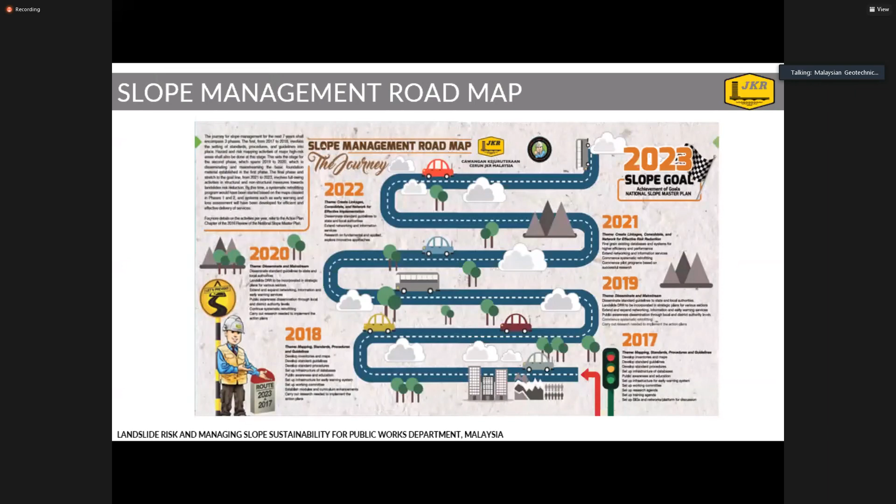Okay, the sentences are quite small actually. All right.

Okay. This is the abstract for our National Slope Master Plan, or we call it Plan Induk Cerun Negara. The first was from 2009 until 2023. However, we have the plan to extend it for another 15 years. So this plan actually serves as a roadmap with 10 main components.

This is under the purview of our slope engineering branch department, and the objective is that the plan should be a dynamic or living document. It should be reviewed and revised throughout the years as national social, regulatory, and technological changes occur. It is designed to be a comprehensive and effective framework.

I would like to mention the 10 main components of this national master plan. The first is to establish the policy and institutional framework. Of course, we have hazard mapping and assessment. We're going to have loss assessment. We are going to have the early warning system and real-time monitoring. We are establishing information collection, interpretation, dissemination, and archiving.

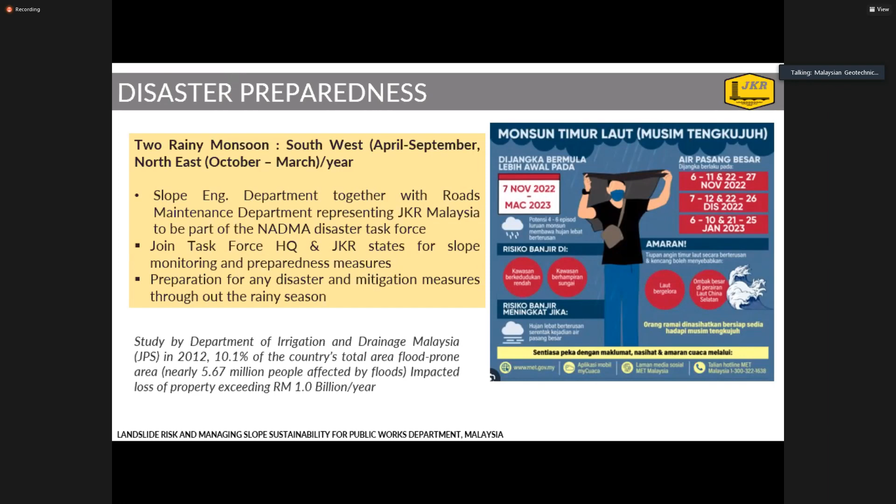A study by the Department of Irrigation shows that about 10.1% of the country is prone to flooding. Of course, about 5.6 million people will be affected, and the recurring cost will be about 1 billion per year for repairing all these slopes and other assets.

Okay, in conclusion, we have 7 key strategies in the slope engineering department. The first one, we aim to have corrective and emergency works for all federal or state roads and also government buildings. We are doing slope preventive work throughout the entire road network for the Peninsula, Sabah and Sarawak. We are establishing forensic and design in our department also. And we are promoting public awareness and education.

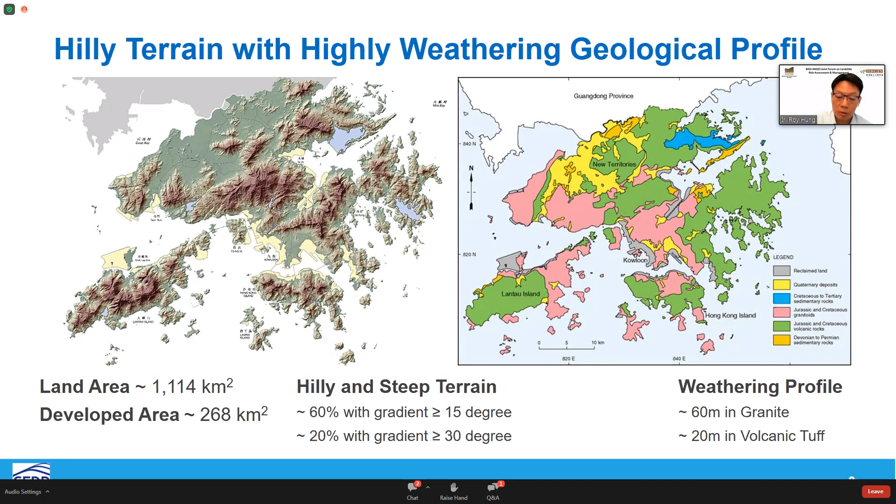But here comes another factor: urbanization. In the old days before 1970, as the history of landslide risk in Hong Kong has been broadly introduced by Hong Kong GES President Dr. Andy just before, the slopes and retaining walls were commonly formed improperly as part of urban developments, such as building roads or other residential buildings.

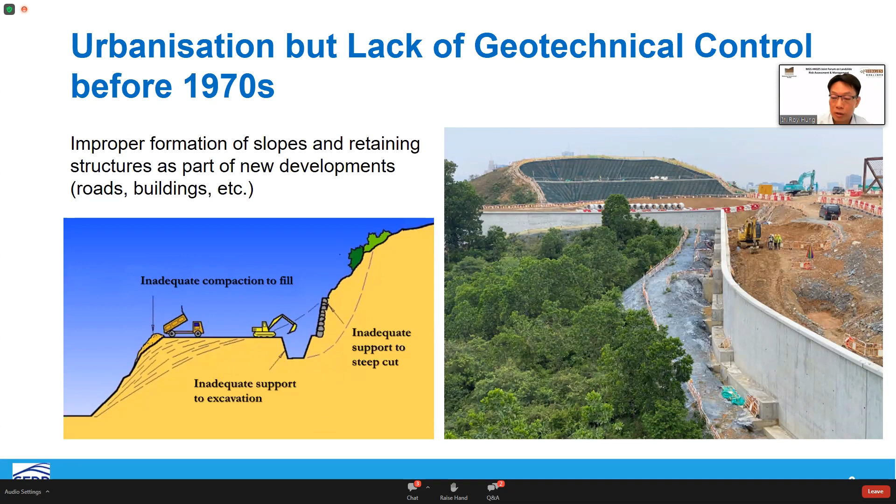So as a result, based on the factors we have just mentioned, the landslide risk is high, and there were a number of catastrophic landslides in Hong Kong, in particular in the 1970s, like the Po Shan landslide and the Sau Mau Ping ones, some with a single landslide incident causing over 70 deaths. So this set the scene of the high risk of landslide in the old days in Hong Kong.

Because of the high risk of landslide, it called for the Hong Kong government's action to work out how to tackle it, not as a one-off operation, but in a systematic manner to bring down the landslide risk in the long run. This is the so-called slope safety system that we have today. It is a long-term commitment and a huge social investment. To some extent, such a slope safety system also gave rise to the growth of the geotechnical profession in Hong Kong.

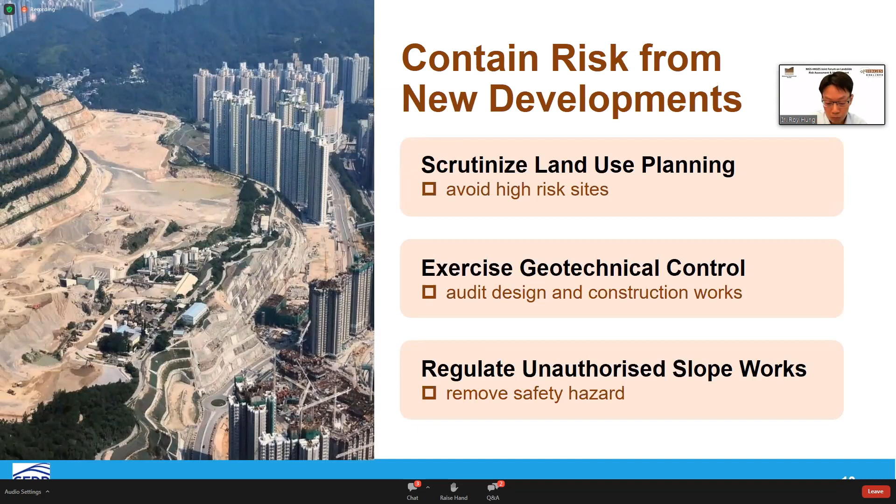The objective of exercising geotechnical control is to ensure that the design and construction of slopes and retaining walls are done to a required safety standard, both design and construction. It applies to all developments, whether government infrastructure projects or private developments. Based on these photos, some building construction in Hong Kong is on steep slopes, so it deserves tight control to make sure it is technically acceptable, as do many mega-scale government projects like highways and railways.

When it comes to the potential hazard of natural hillside landslides that could affect proposed new developments, we regulate by requiring detailed hazard assessment and the provision of the necessary hazard mitigation measures, for example, in the form of a landslide resisting barrier structure.

For mitigating natural terrain hazard, it's more tricky. Apart from controlling the engineering design or its layout, we would also advise proposed developments to locate away from where the landslide hazard may be more severe. As you can see here, part of this hillside was hard hit by previous landslides, maybe in the form of channelized debris flow. So we advise them to relocate a little further in order to reduce the risk.

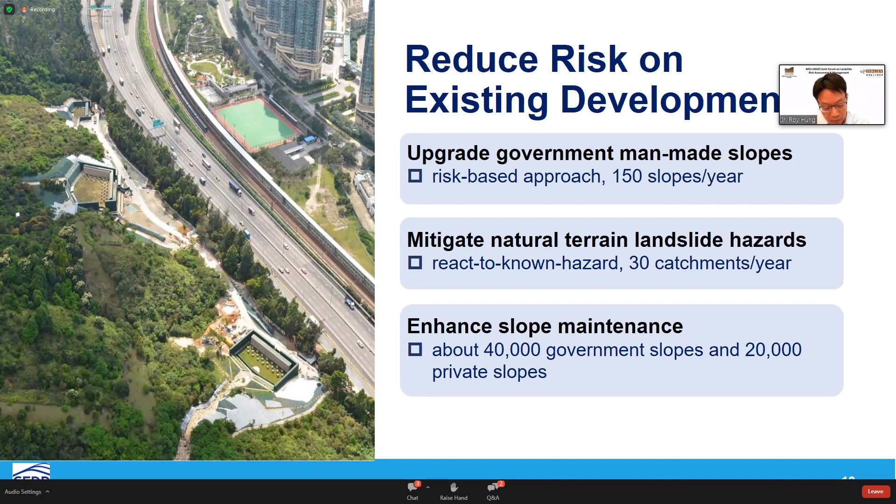Okay, it's about retrofitting the existing slopes, right? We have been doing this continuously through a rolling program, the so-called Landslip Prevention and Mitigation Programme. This one started in 2010, but our history actually dates back decades. To sum up, it is not a one-off, but a long-term operation covering the entire territory.

Our target is to upgrade around 150 government man-made slopes based on a risk-based approach, and also to mitigate the potential hazard of 30 natural hillside catchments based on a react-to-known-hazard approach. So what is the so-called react-to-known-hazard approach?

That means across all the natural hillsides in the territory, we'll identify those for which the risk is higher, as evidenced by previous landslides there, as you can see in the photos here. Particularly for areas with previous landslides, we'll opt to handle them first by building some defensive structures.

So for man-made slopes, we upgrade them through different engineering solutions with respect to the different types of slope. For example, for fill slopes, we'll do recompaction or replace with some stronger material. For cut slopes, we normally upgrade them using soil nails. In fact, nowadays soil nails account for over 95% of our slope upgrading works, which is our principal upgrading scheme.

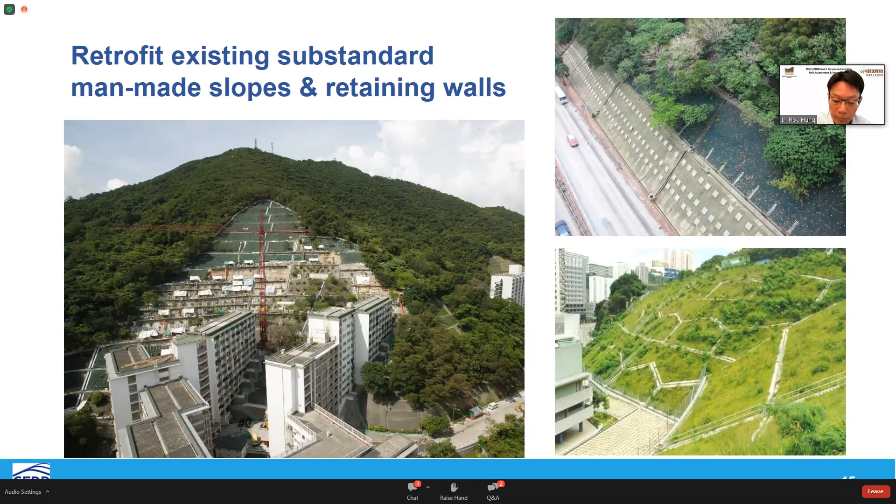And for natural terrain hazard mitigation, in principle and if practical, we will provide defensive measures such as barriers against the risk of landslides, instead of stabilizing the potential landslide source areas uphill. For example, reinforced concrete barrier structures and steel flexible barriers. There are also some enhancements such as boulders within those barrier structures for energy dissipation.

As part of our slope upgrading works or natural terrain mitigation works, we also incorporate elements of ecological enhancement in order to make the slopes greener and more ecologically friendly. And we also use some guidelines to promote greening and bioengineering.

When it comes to slope maintenance, we are taking a systematic management approach, first clearly defining the maintenance responsibility. We have altogether around 60,000 slopes in Hong Kong, and for each of them, we assign a maintenance party or agent who is responsible for the maintenance work. In principle, it's just like asset management, right? The government is responsible for the maintenance of 2/3 of them, while for the rest, the private owners have to do the maintenance work.

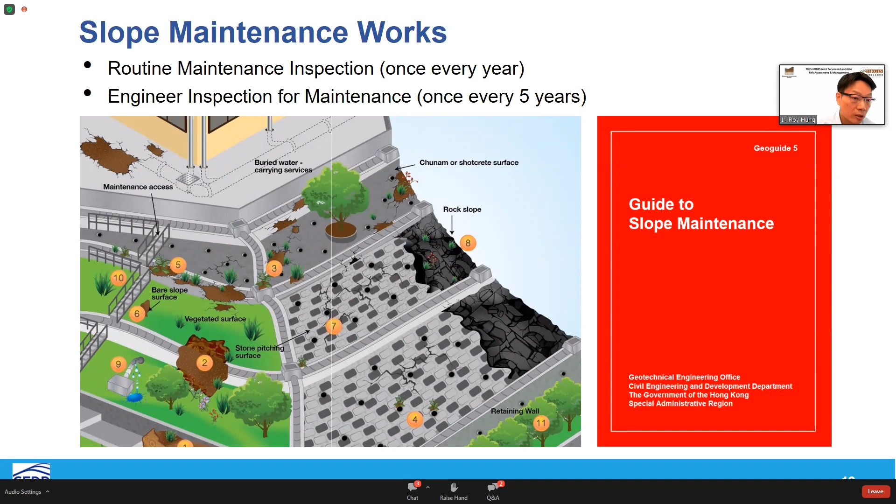Slope maintenance may appear trivial to many, but it should be done properly if you want it to be effective. So in this regard, we publish guidelines to advise on what to do and when to do the maintenance-related inspections by a suitably qualified person, and to carry out the respective maintenance work as needed. For example, here are some guidelines showing what to do and where, so that even maintenance agents who are laymen and not geotechnical professionals know what to do.

Okay, about the multi-pronged landslide mitigation strategy. Thirdly, we are also managing the risk by minimizing the landslide consequence. What does it mean? Apart from the engineering measures we just mentioned, it is equally important and effective for us to raise the awareness and preparedness of the general public against landslide risk and to stay away from it. To some extent, this approach is more people-centric and cost-effective because it doesn't need huge capital investment.

So what we have been doing is to clear squatters with vulnerable structures from hilly terrain, and provide landslide emergency services in order to minimize impact and damage. Also, we issue landslip warnings to alert the general public and educate them on precautionary measures.

But in Hong Kong, we have a landslide warning system here, for which the warning is issued by the Hong Kong Observatory, like other weather-related signals, in collaboration with the GEO. It aims to alert the public on the risk of landslide at the time of heavy rain, and whether or not to issue the warning and when to issue it is actually based on the rainfall intensity by the rain gauges across the territory.

Well, based on our experience, this warning system is quite promising. Why? Because it is promising in alerting the public, because actually most of the recorded landslides that occurred were occurring at the time when the warning signal was hoisted. So that means the rationale we have been putting in for the landslide warning is quite effective.

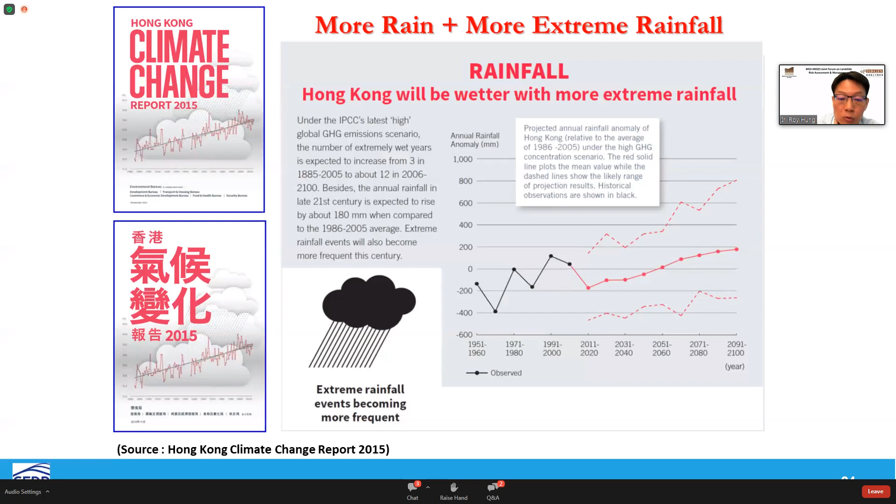So ultimately, what is the effect of the extreme weather and rainstorms? That is more landslides, landslides on a larger scale, and the landslides become more mobile. So to summarize, the climate change will make our landslide risk higher and higher.

Okay, so here is another challenge, again about climate change, but this one is about the mission towards carbon neutrality, which is a global mission for all, right? So in the year 2021, that is 2 to 3 years ago, Hong Kong also put it in our agenda officially and set the mission and vision so as to align with the international ones. We are also in the agenda to cut and reduce the carbon emission per capita and also for Hong Kong society overall.

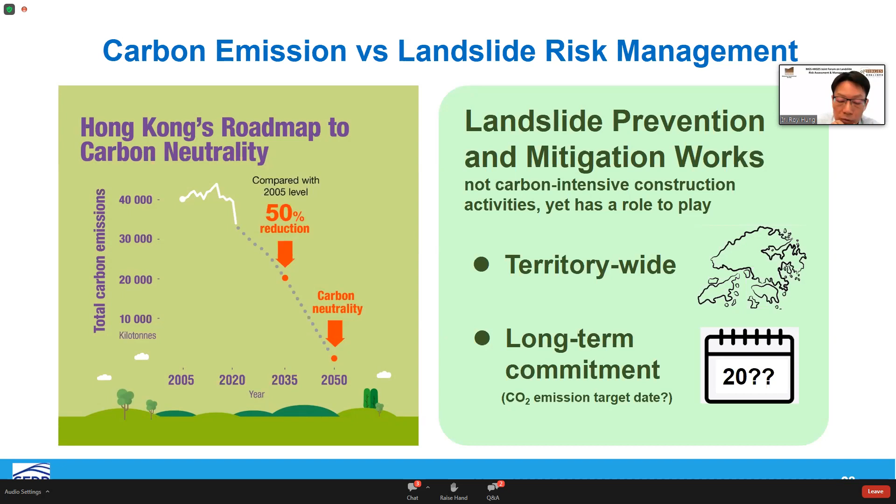So in fact, in terms of carbon emission sources, one of them is construction-related activities. And in this context, it has something to do with landslide risk management, because even though we are not very carbon intensive, our work also involves engineering construction works, especially our slope works, which lie across the entire territory, and it's long-lasting work. So we have to do something to align with the carbon neutrality.

Okay, and lastly, the last challenge is a societal one that is facing all industries and sectors, not only the work related to landslide risk management. That is, we are running out of talent. We need professionals for planning, investigation, design, and analysis for landslide risk mitigation measures. And at the same time, we also need workforce, but the challenge we are facing is the talent shortage and also the aging workforce.

So with respect to all these challenges, we are moving ahead with our landslide risk management with new objectives. I would say that our work in landslide risk management we have to keep doing, but now we have to make it more data-driven, fast and reliable, resource efficient, more accessible and sustainable. In response to all of these objectives, the landslide risk management work that we are doing now, we have to work in a smart and sustainable manner. Some of the work is just like what it was in the old days, but we have to do it along these two new directions.

Actually, in Hong Kong, GEO has been moving ahead along this direction with many initiatives. For the purpose of this speech today, I just broadly categorize them in three areas. I'll briefly talk about them one by one. First of all, it's the geotechnical information infrastructure. We call it an infrastructure because it is not only a database. It is a platform that integrates a series of separate information systems related to landslide risk management, and each carries its own function. By doing this, it has enhanced accessibility, efficiency, and data sharing. This synergy is very good; now we are able to not only boost productivity, but also contribute to many improvements between the systems.

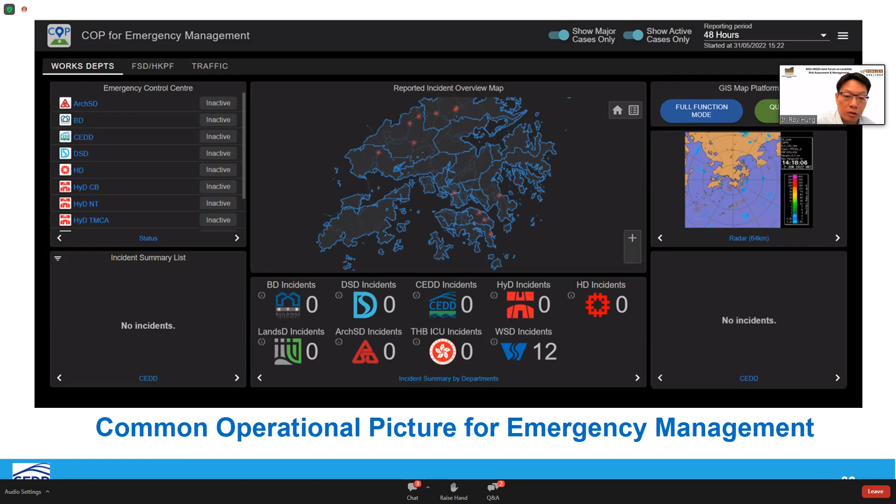We also developed a city resilience platform called the Common Operational Picture, which centralizes the emergency actions of different government departments. This is important and very useful because very often joint action is required among different parties. For example, a landslide could affect the traffic of a busy road, or block a major drainage and give rise to flooding. So this information, collaborating different parties, is very useful.

And the slope information system I have just introduced is not confined only to people working in the government or in the profession, but is also accessible by the general public. It contains much information visually and in text, so for those who want to know more, it is very informative and readily accessible.

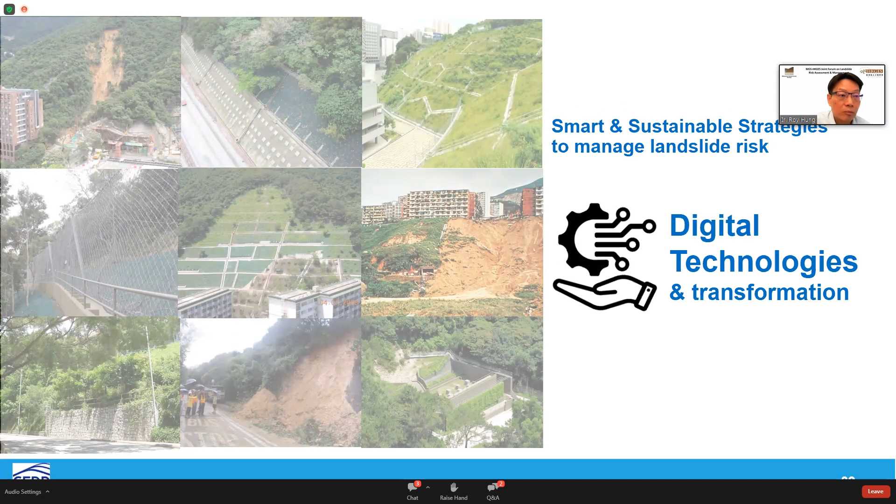Next, apart from those information systems or infrastructure, we have been actively adopting digital technologies and digital transformation for a range of tasks and activities throughout the process of landslide risk management, from planning and investigation through to long-term monitoring. Here, I will highlight a few examples. The first is our active use of remote sensing technology. We have been doing airborne LiDAR surveys to collect information, and we have been doing this for over 10 years.

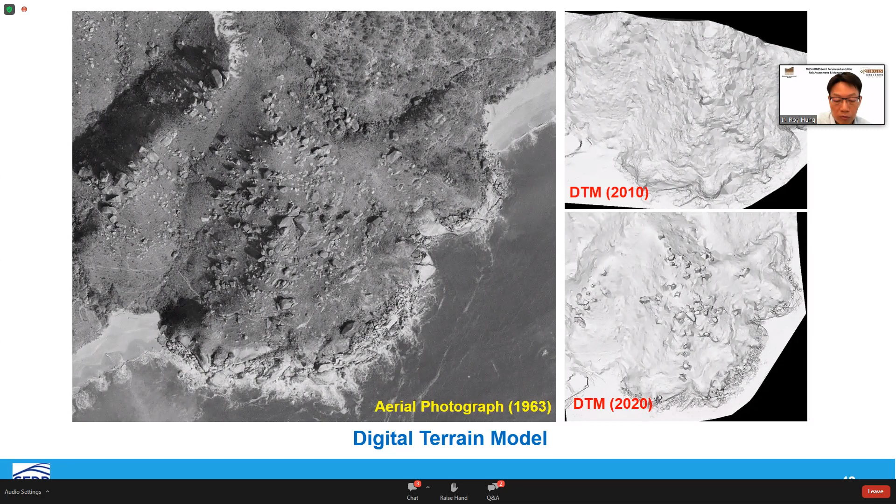In the year 2020, we completed the second round of territory-wide LiDAR survey that collected a wealth of very useful data sets for the terrain. You can see that the most updated LiDAR data set can produce a digital terrain model able to show important topographical features with a quality comparable to aerial photos, at least for planning and design purposes. This is very useful. Another example: apart from design, investigation or planning, we also do airborne surveys for new development projects. As you can see, it is able to create a digital terrain model for a mega project design.

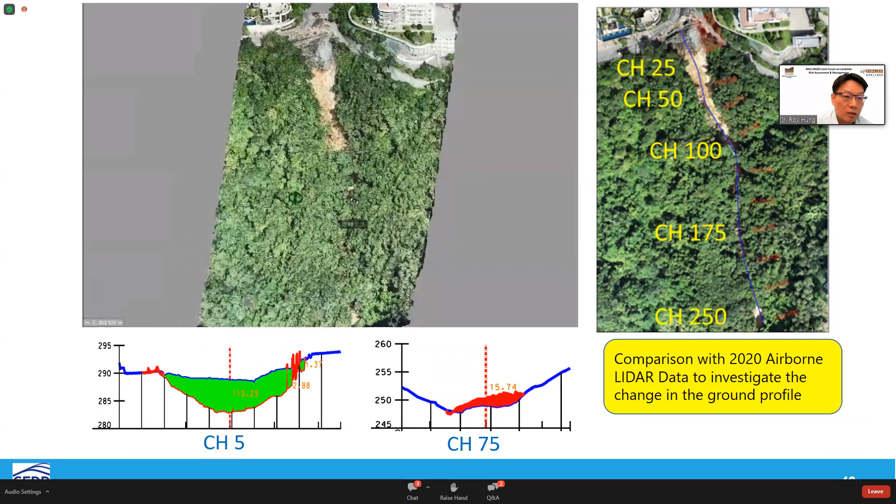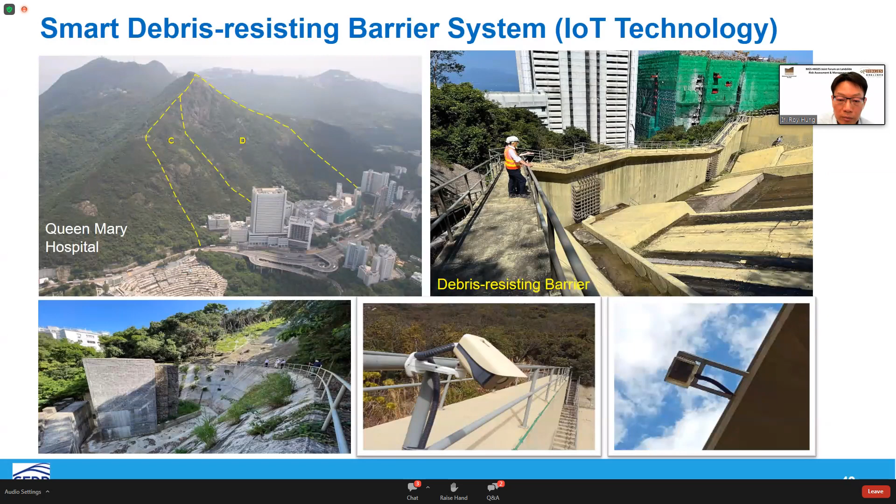And then another example of the digital technology is the smart debris-resisting barrier system, which employs Internet of Things technology. In this case, we have built a reinforced concrete structure to protect the Queen Mary Hospital from the potential landslide hazard from the catchment you can see here. At the same time, the structure functions to resist and retain the debris. But we also installed sensors such that it can detect and then signal the landslide in real time. So here are the sensors.

So likewise, sensors and cameras are also used for the steel flexible barrier for real-time detection of the landslide. And the beauty is that this landslide detection system equipped with the sensor is also accessible through the mobile app, so you can get the signal in real time through the cell phone.

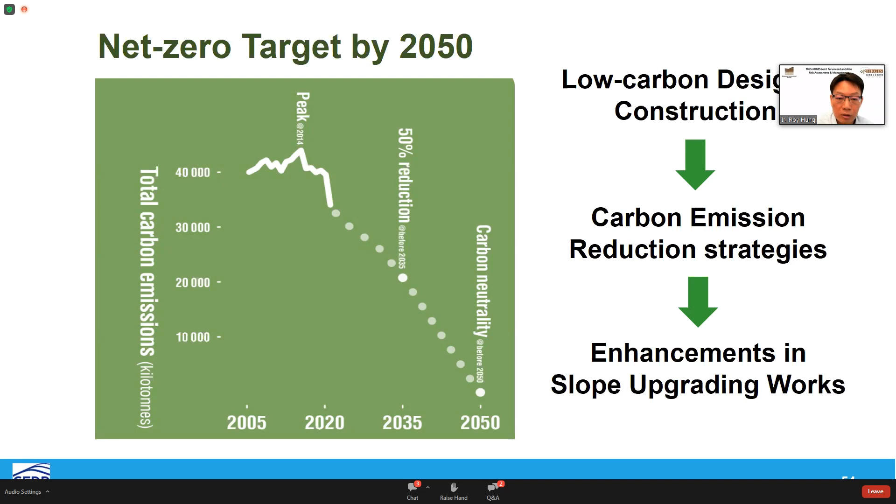And lastly, I'll quickly go through the sustainability strategy that we employ in our landslide mitigation measures. So working towards the net zero carbon emission targets, we first start by embracing the guiding principle of low carbon design and construction. And along with this direction, we then explore and formulate the carbon emission strategies. And then finally, materialize this by implementing it in the slope upgrading works. Actually, now we are on the way to formulate.

Yeah, Roy, sorry to interrupt. I'd appreciate it if you can wrap up in 2 minutes. Okay, I can.

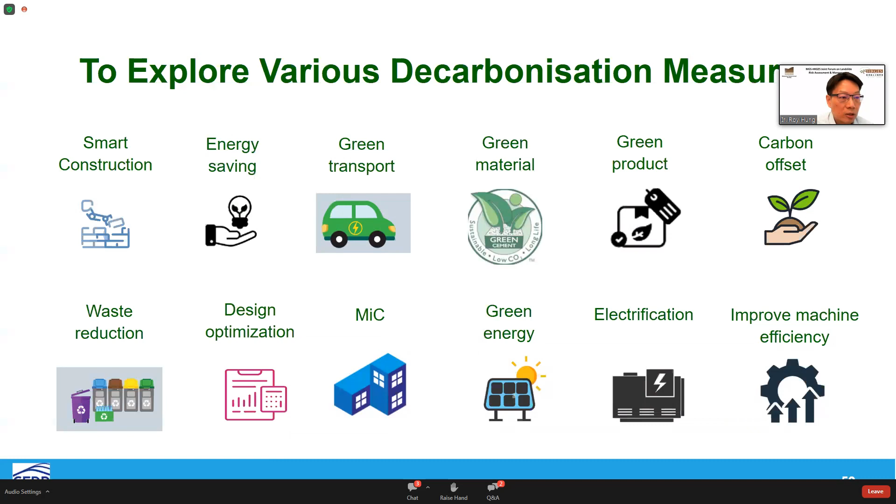So actually, we are on the way to formulate our strategy by getting the baseline intensity, setting the targets, setting the roadmap, and determining our decarbonization measures. So in the interest of time, perhaps I'll skip here. There is some preliminary work that we have done. We try to categorize the most sensitive areas of work so that we are able to decarbonize our work in a more effective way. There are many different aspects that we will be exploring to decarbonize. One of the ways is to promote wider use of green energy. I believe many people in other sectors are doing that. So hopefully we can identify the scope in our slope stabilizing works to utilize green energy options.

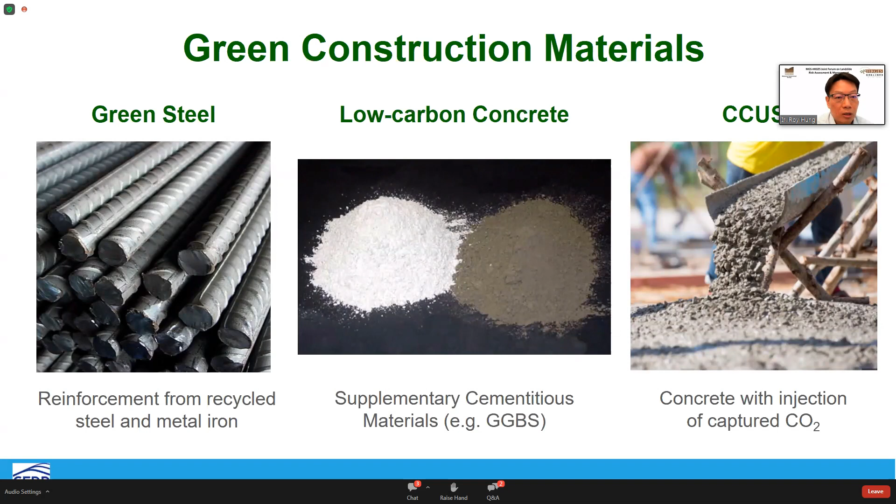But compared with green energy, the prospect of using greener construction material is more promising in our agenda. In Hong Kong, we are now moving ahead with using more environmentally friendly supplementary cementitious material to replace cement. And other upcoming options are the so-called green steel and carbon capture, utilization and storage measures. And lastly, in terms of decarbonization, we also carry out trials of nature-based solutions, for example, bioengineering to improve the landslide scar instead of putting in man-made material for the stabilization measures.

Okay, so in the interest of time, here are the key messages of my speech today. Our landslide risk management in Hong Kong is a long-term commitment because there will never be zero landslide risk. So I can say that landslide risk management is an endless battle. We have been adopting a multi-pronged approach, but at the same time, we are facing increasing challenges. So looking ahead, the two major trends in managing landslide risk are to accelerate the application of smart technology and to embrace sustainability in our landslide mitigation work.

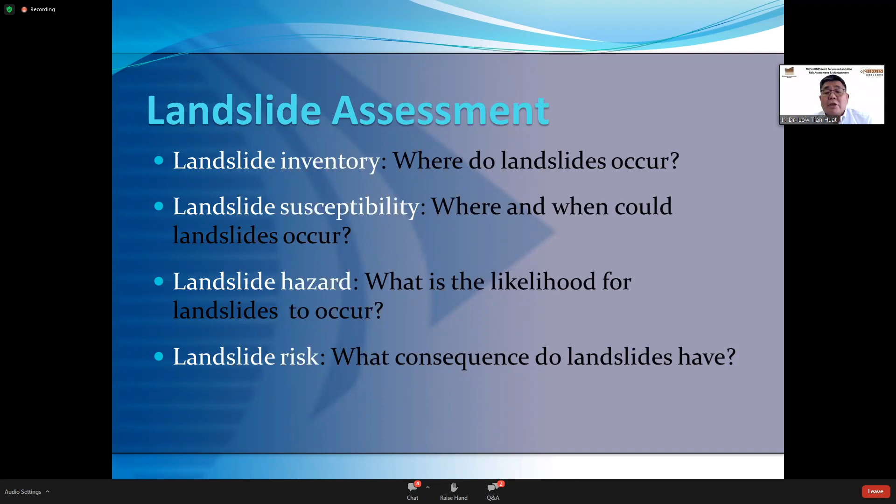Let me share some of my experience in landslide risk management and assessment for the past 20 over years until today. Just some of my works done. Now, before we talk about landslide assessment, there are a few questions we would like to ask. For example, do we know how many landslides we have? Where do the landslides occur? And the landslide susceptibility, where and when could the landslide occur? And landslide hazard, what is the likelihood for landslide to occur? And also what are the consequences of the landslide?

So definition, I think just now Dr. Ahmad Shukri has actually been through with us what is the definition of landslide hazards. Apparently it's the probability of occurrence. And some say it's a likelihood or potential of damaging landslides. These are some of the landslide hazard definitions. For element at risk, we're talking about the populations, people living around the slopes, buildings, and all these economic activities, and that is actually the element at risk. And when we talk about vulnerability, it's the degree of loss to the element at risk.

For risk, basically it is the product of consequence with the hazards. So there are some other specific risks, total risk. So there are some definitions of risk here. I'm not going to go through in detail, just like to bring you along as we go into the topic of risk management.

Hazard assessment methods. There are three main methods of hazard assessment in Malaysia. Particularly individual slope assessment, that is the bread and butter of geotechnical engineers. And then there is linear based, that is for all the linear infrastructures, the road, highway, infrastructures like power cables, transmission towers. These are more towards linear based assessment. And then we have area based assessment, that is actually for an area, particularly for developments, and so on and so forth.

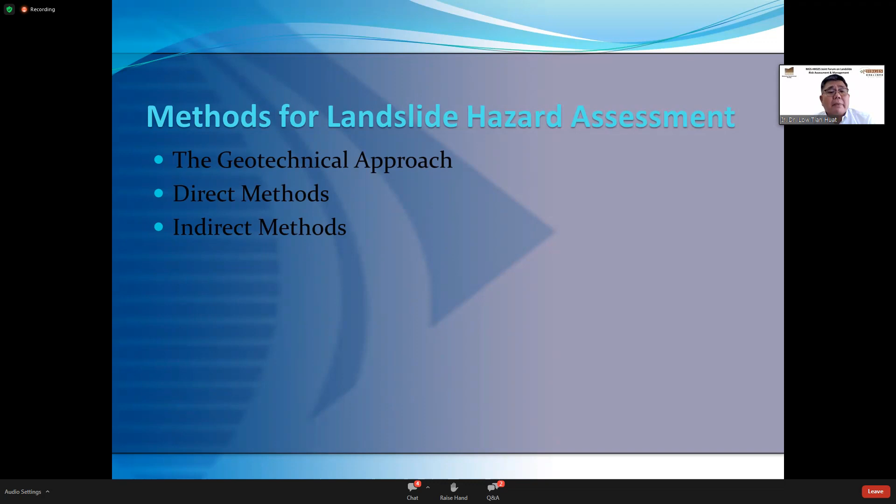Method for landslide hazard assessment, we have three main categories. One is using the normal geotechnical approach, where we run stability analysis and we get the FOS, factor of safety, and then we look into the hazards, which is the likelihood of failures for slopes. And then we have direct methods and indirect methods. Geotechnical approach, as I said, is for individual slopes. You run it for specific projects rather than regional studies. For example, slope failures, a slope for developments. You need to get to know the hazard conditions, to know the stability conditions. We go through the geotechnical approach.

Direct methods, these are the methods applied when we go on mapping works, directly facing the slopes, where you're going to have geomorphological mappings, you're going to carry out geological mappings, and things like remote sensing. And the methods produce landslide maps, which can be converted into hazard maps through appropriate subdivision and zoning activities.

Indirect methods, this is actually quite a famous or quite normal way of doing hazard assessment now. We're using GIS, Geographical Information Systems. We're using statistical approaches, for example, from a very simple one like pairwise to neural networks to the more advanced, which is artificial intelligence, or what some people call the subset of artificial intelligence, which is the machine learning approach. These are some of the new approaches that we are actually venturing into currently, for some of the projects in hand.

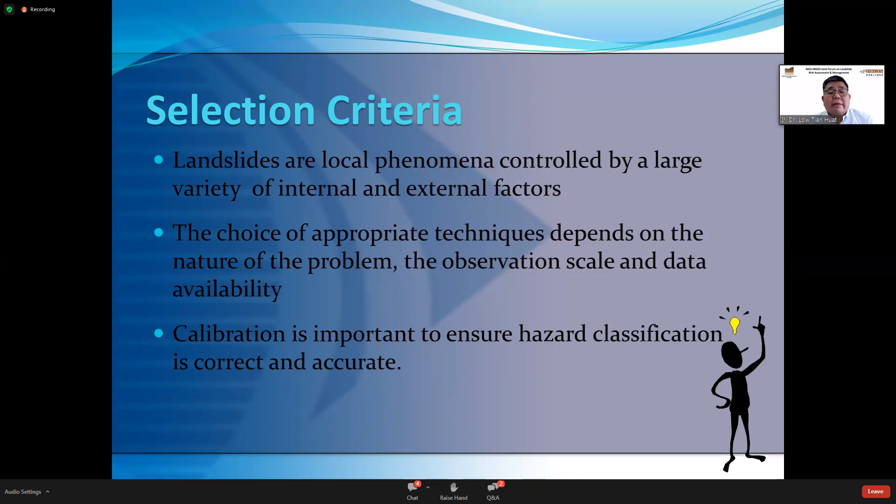Slope management systems. An effective slope management system requires some information. If you want a very good, effective slope management system, there are the following questions that you have to ask. How many slopes do we have along this highway? Sometimes when we have a road, we don't even know how many slopes we have, how many cut slopes, how many natural slopes, how many embankments. So this is the first question: how many slopes do we have along the highway or along the road?

Then how many slopes with instability problems we have to identify, and where do we have urgent issues? And where are we likely to experience problems in the future, and what should we prioritize? For example, the budget allocation: where do we start first, or which slope do we start to strengthen first? So these are some of the questions you have to ask when you come to a good, effective landslide management system.

So to answer this, we need to develop an asset database. To answer more complicated questions, we need data integration, processing and analysis to be carried out. A slope management system is a tool to help answer such questions. The output of this management system can be used for routine maintenance management. Simple things like knowing where your broken drain is, where your slopes with erosion are, where the slopes requiring surface protection are, and where the slopes requiring upgrading are. You identify the location and the quantity, and prioritize the work.

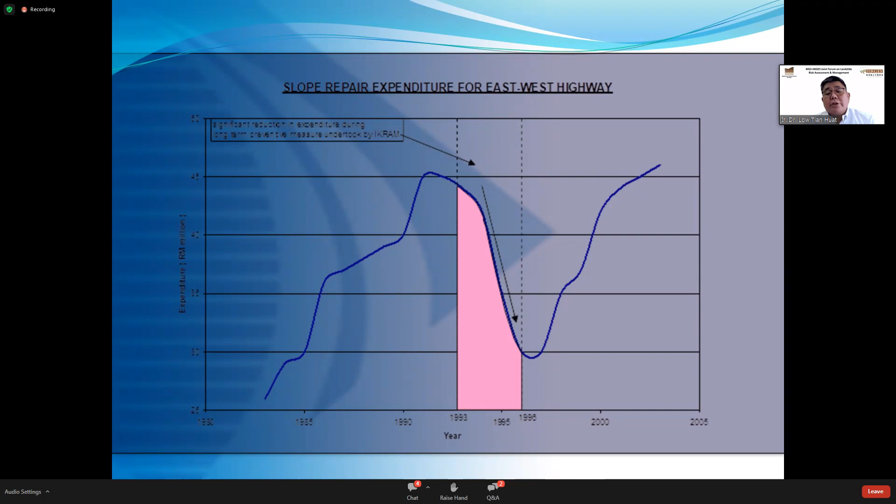This was taken from a paper by engineers back in 1997. Now, for private sectors, we have done some work for Genting Highlands, Resorts World, our famous casino on the hill, and then the Petronas gas pipelines, the Sabah Sarawak gas pipeline, the Petronas gas pipeline for Kerteh, Terengganu State, and I have also just completed my studies for another new highway, the SUKE highway.

Area-based assessments: I have actually completed the entire Penang Island for the Public Works Department, JKR, then the Selangor States for the Mineral and Geoscience Department, Bukit Kelana Miri in Sarawak for JKR, and also the Genting Highland land bank, all the land on Genting Highland, on behalf of Resorts World Malaysia.

Now, effective landslide risk management. This is one of the best which we actually looked into. We reviewed the Sabah Sarawak Gas Pipeline geohazard management practice. They have a very good practice called IMMR, which stands for inspection, monitoring, maintenance, and repairs. The inspections carry out regular inspection with aerial surveillance.

Then they have light detection and ranging, using LiDAR to capture all the information. They carry out geohazard risk assessment. They have instrumentation, including InSAR using satellites. Development of a web-based geodatabase to store, manage, and retrieve data for all these gas pipelines. I think maybe Johan later will brief us on that.

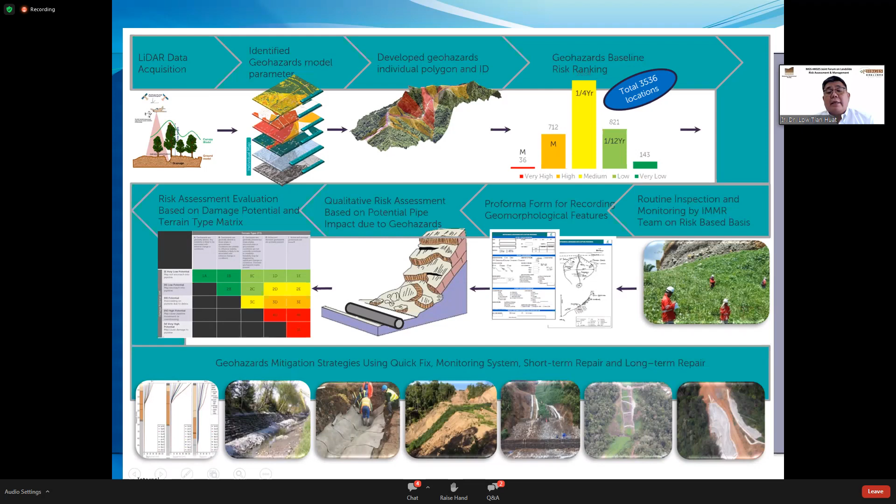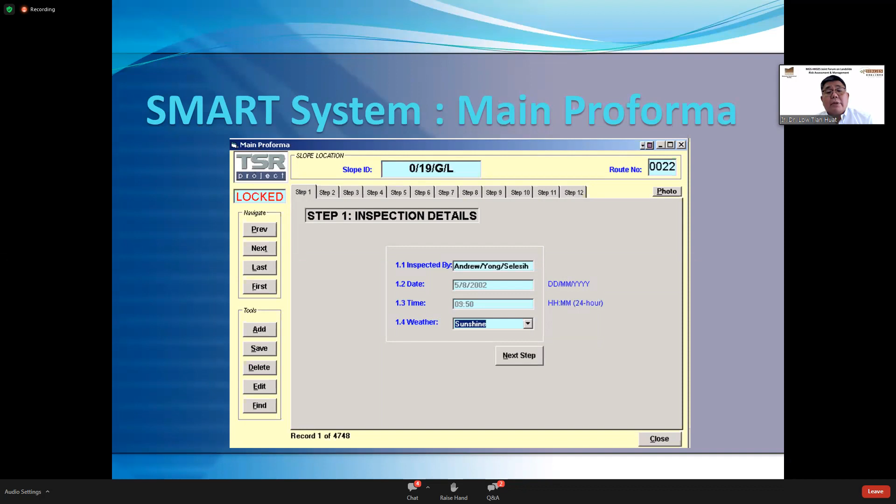Sorry to interrupt, Dr. Low. Appreciate if you can wrap up the presentation.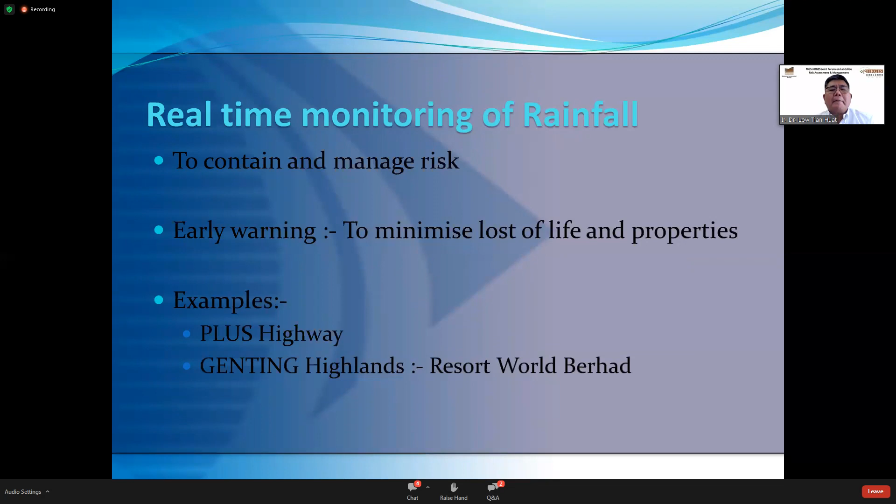And we have some rain gauges for Genting Highland Resort World, about 8 of them. Okay, these are some of the examples. So we installed them many years ago. I think they were actually installed with thresholds back in 1995, then the thresholds were reviewed back in 2008.

Right, these are the locations for Genting Highland, some rain gauges. The threshold we use is actually based on 1995. There was one massive debris flow occurrence, and then within the 5 kilometer radius we had hundreds of landslides. Based on the data, we produced these rainfall thresholds. You can see we have a landslide threshold and a critical threshold. So these are the thresholds.

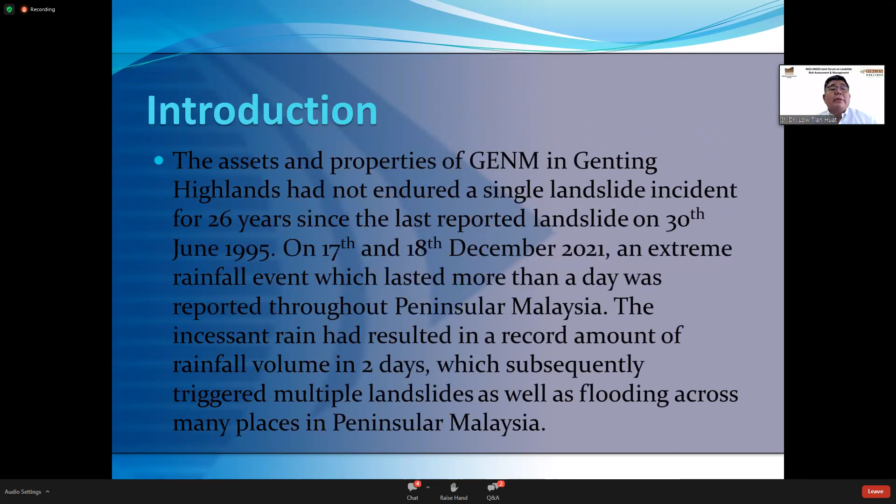Okay, one very serious incident happened back in 2021. During that rainstorm, we had about 200 landslides on Genting Highland. I'm not going to go through it in detail. Maybe I can show you some of the photographs. Not only Genting Highland, but within that 5 kilometer radius on the government roads, a lot of landslides actually occurred. These are some of the recorded photographs.

We actually drove outside Genting Highland, on the Bentong–Kuala Lumpur Road. There were a lot of landslides. And for your information, the threshold was actually triggered before the landslides happened. These are some of the rainfall records for 3 days and 6 days. These are only 2 rainfall records that I've shown you. We have about 8 rain gauges along Genting Highland as well.

So the conclusion is that knowing the hazard and risk level for road slopes is actually crucial for landslide risk management systems. So you have to know the hazard and risk level, and then for effective geohazard management systems, as I said, for all the systems we have gone through, IMMR is quite an important approach where you have inspections, monitoring, maintenance, and repairs.

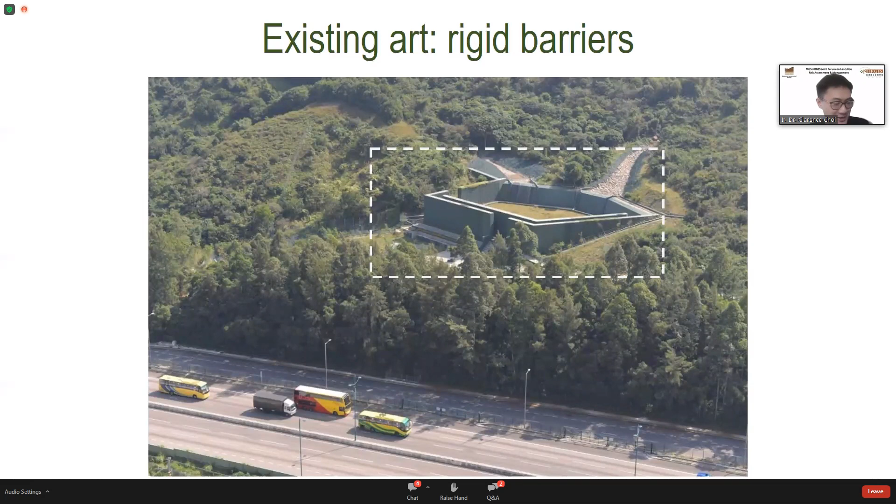So before I start off, I just want to share what the existing state of the art is for physical countermeasures. We might install these rigid reinforced barriers at the end of a catchment to catch a particular debris flow. These are quite massive reinforced structures, and they might not be so sightly. With the advent of sustainable engineering, these may not be the best options. Of course, we've tried to improve the state of the art by moving towards more compact structures such as flexible barriers. You can see them installed on the hillside here.

But nevertheless, it would be nice if we could leverage the effects of forests and understand whether they provide additional impedance to flow-type landslides. So to the main point of today's talk, the question is: do forests act as a natural barrier against debris flows?

There are several factors we have to consider. This is a complex problem owing to uprooting, wood-laden flows, and irregular tree patterns, because trees grow as they wish. We have erodible soil beds, complex flow compositions, and sometimes even boulder enrichment. So we wanted to tackle this problem by developing a high fidelity numerical model first, using idealized situations, and progressively ramp up the complexity. So today I'll share with you some of the work we've done, up to the effects of uprooting.

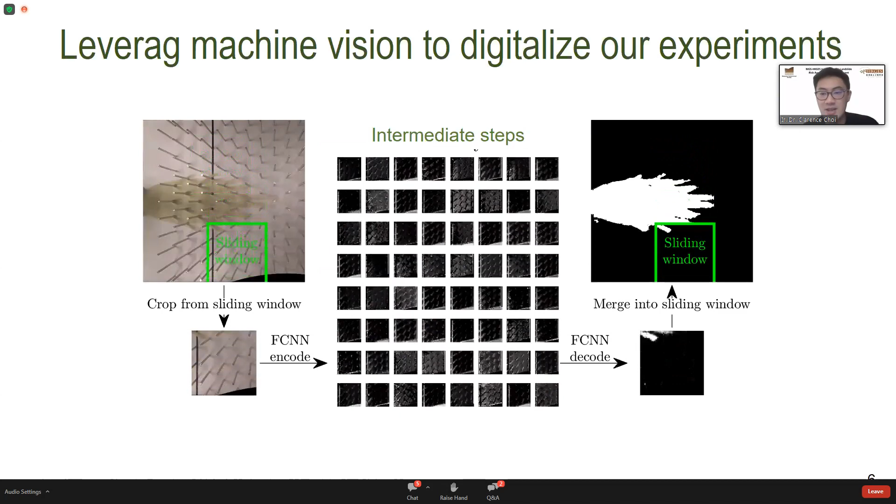To help us understand and capture the kinematics, we resorted to leveraging machine vision to digitalize our experiments. We essentially use a sliding window and FCNN to turn all the frames from high-speed cameras for the physical experiments into some sort of numerical interface so that we can use it to calibrate numerical models. So essentially what we did was we took our experiments, captured the flow profiles, and came up with a digitalized overlay. And although this overlay is useful, it doesn't have any constitutive behavior.

So with that said, we adopted a GPU-empowered material point method framework to give our digital overlays some constitutive behavior. We use a Drucker-Prager criterion, and we have gasification effects. And for the flow, we adopt a mu-I rheology. To model tree, stem, and debris interaction, we use MPM-DEM coupling.

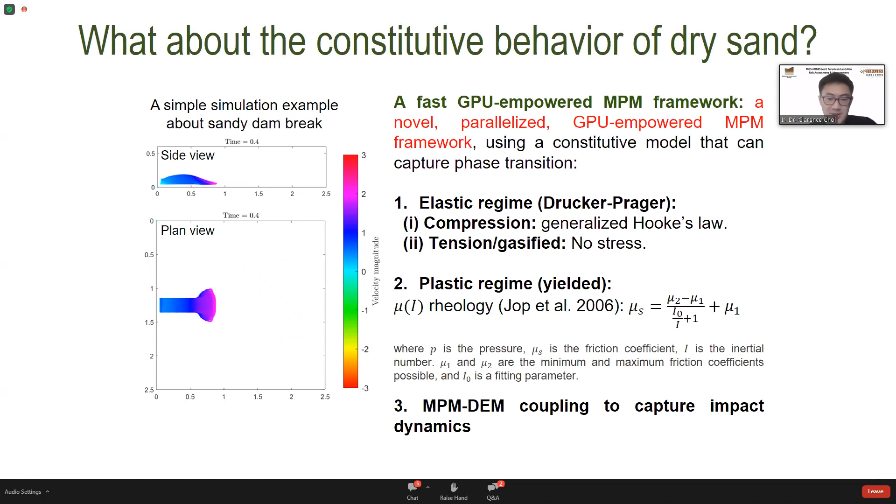So once we have a calibrated model, we can start to break this problem down from a fundamental point of view and look at idealized configurations first. Of course, you may be saying trees don't have this kind of pattern in the field. Well, of course, but it's always nice to start from simple to look at idealized configurations. But it's also worthwhile to mention that cultivated forests for hazard mitigation are very much installed in regular arrays. So this is not entirely unrealistic.

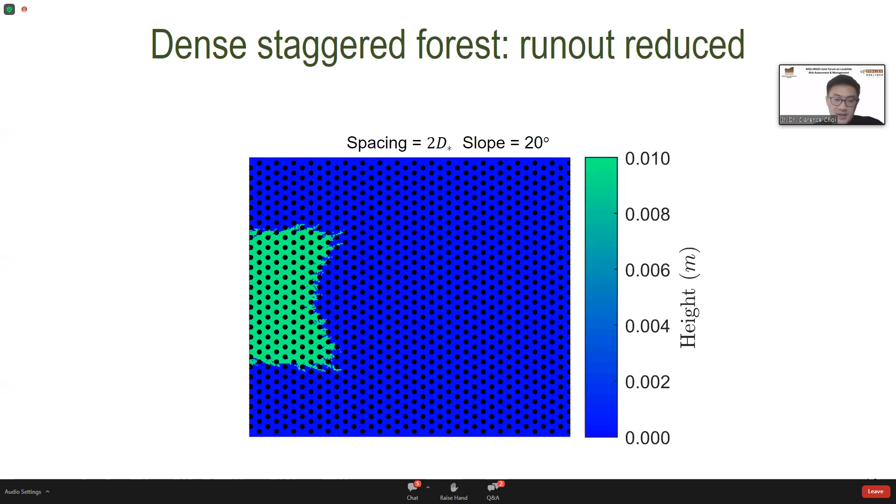If we look at more complex configurations, staggered arrays, as shown on this particular slide, you can see staggered arrays are very good at dissipating energy and spreading the flow laterally. And it does eventually arrest the flow here. However, if we zoom into these staggered arrays, we do see the same effect happening. There's a self-channelization effect caused by these regular patterns of tree stems here.

So this was quite interesting for us to see that, contrary to what we thought, that forests are always excellent at impeding debris flows, in this case the impedance effect is not entirely true because of channelization. So in much brevity, I just want to say that although in some cases, forests can reduce the mobility of flow, there are some cases where it actually enhances the mobility of flow.

So we first looked at tree spacing and patterns, and then eventually we looked at uprooting. So it's actually not that easy to model uprooting. The uprooting process is simple. You can provide some sort of resisting moment or bending moment for uprooting, but the main problem is how do you model the stems after they're uprooted in a physically correct manner.

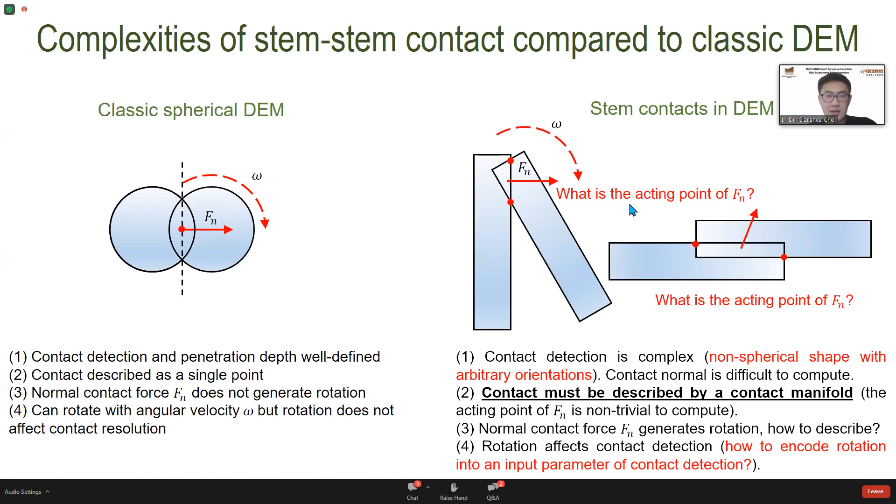So we embarked on a journey to come up with a high fidelity numerical solver that can capture stem-stem contacts and MPM-stem contacts. So we essentially adopted some video game algorithms, the Gilbert-Johnson-Keerthi algorithm for contact detection, and then we can use a level set DEM to get the contact normal and contact patch, which allows us to get the contact force and moment. And if we update position and rotation using a quaternion approach, we can, in theory, get the right physics.

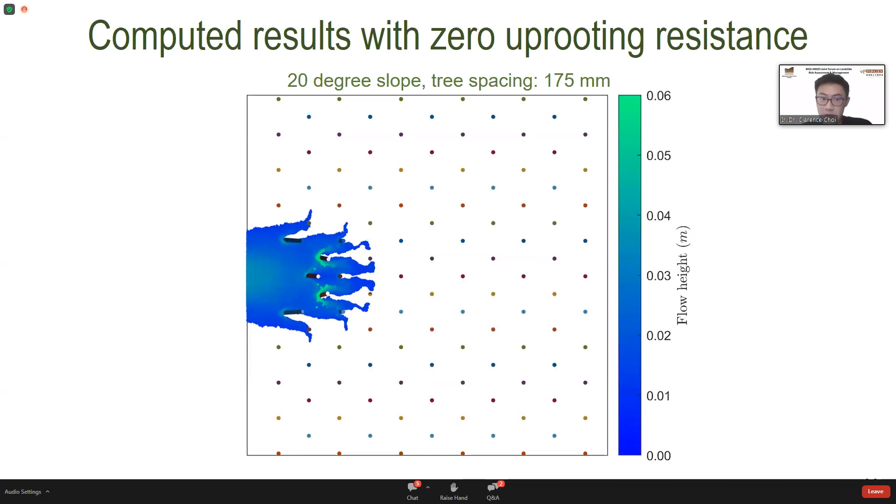So with the correct physics, we can move on and look at uprooting. Here's the same experimental setup I showed earlier. This is a dry granular flow moving through the same staggered forest configuration. And in this case, I gave the tree stems no uprooting resistance. I just used the inertial component of the tree stem to resist this granular flow.

And it's quite interesting. If you want to put in uprooting resistance, you can put it at the base as some sort of bending or impact resistance. That's quite simple to do. But more importantly, we have to try to evaluate whether the post-impact tree stem flow interaction is correct. Well, we need to work on that. That's not entirely an easy problem to deal with.

And if we want to further look into this problem and compare, here's an apples-to-apples comparison of what happens if we ignore the effects of a forest in the mobility assessment on the left. So this is a clear board without trees, and this is the deposition. I increased the friction significantly because of time constraints to present these findings to you today. So that's on the left with no forest, and on the right, if we have a forest, but with no uprooting strength. It's quite interesting to see that the forest here actually creates a negative effect on mobility.

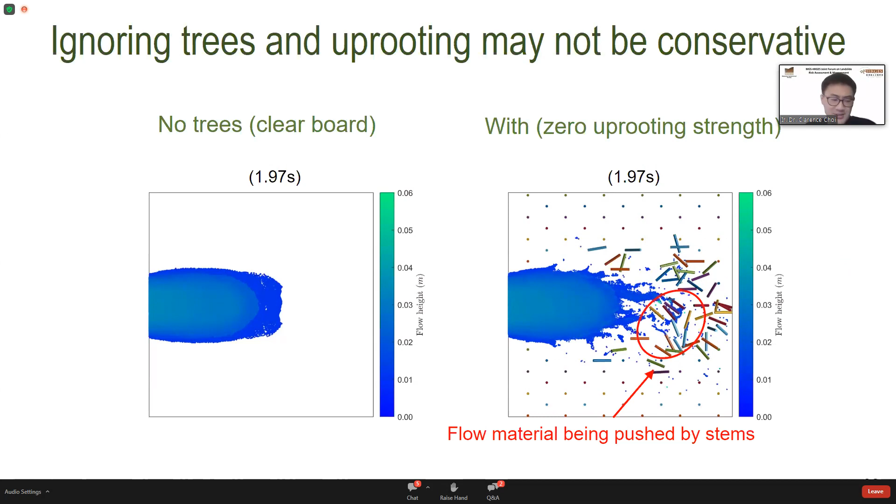We can see that the flow, it's to scale here, actually travels further for the forest case due to concentration of momentum. And also, it's unclear what these stems are doing, but you can see the cluster of stems here are actually driven out much further to the right. So there seems to be a negative effect caused by the forest.

And the main take-home message that we found so far, based on some preliminary research, is that forest and uprooting may not always have protective effects against flow-type geohazards. So if we can further improve our modeling capabilities, perhaps entrainment, boulder enrichment, biphasic flows, maybe we can start to back-analyze field cases and try to understand the true effect of forests as a natural barrier against flow-type landslides, such as debris flows.

Some preliminary findings with my collaborators, Dr. Jin-Hung Chu, and my PhD student, Yang Zhengyu, are at the bottom here if you're interested.

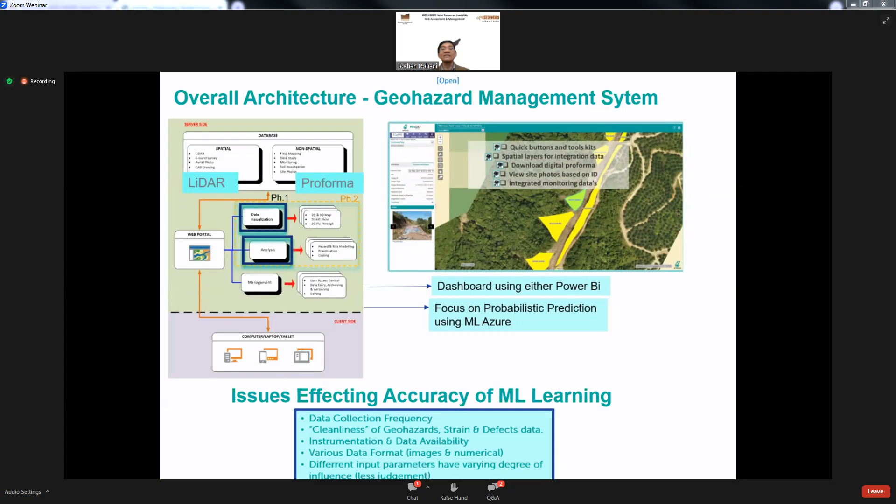But what are the problems with using machine learning? When we use machine learning, it means that we need data. And these data are usually data from the field that are sometimes in a handwritten format, some of them are translated to Excel, and then we have images. So we need to clean this data so that the machine learning can learn. And we have instrument data and various format images, so we need a system to be able to manage them. So we have a system with a large amount of data in various formats, and we need to train on this data to understand risk. So those are the issues with machine learning.

So where does machine learning fit into our overall system? We are trying to build a digital twin framework. I think this is the modern terminology that we've been trying to achieve, digital twin. But I have to share with you that from my limited experience, it is quite a challenge to achieve that. So in a digital twin system, we need data input, we need the analysis, and we need the output, and we have to have a foundation of experts, cybersecurity, a change management system, and sensor infrastructure to manage this digital twin. But my topic will focus on the machine learning portion in the analysis part of this digital twin.

So, machine learning. To declare, the need to incorporate machine learning only became apparent to us over the last few years, so we are relatively new in this journey. But just to share, for SSGP, the Sabah Sarawak pipeline, we have about 20 independent parameters or variables that we need to understand. This includes things like slope height, slope angle, signs of distress, distance of the slope to the pipeline, and distance of the stream to the pipeline. These are data collected in the proforma by the geologists that we need to gather.

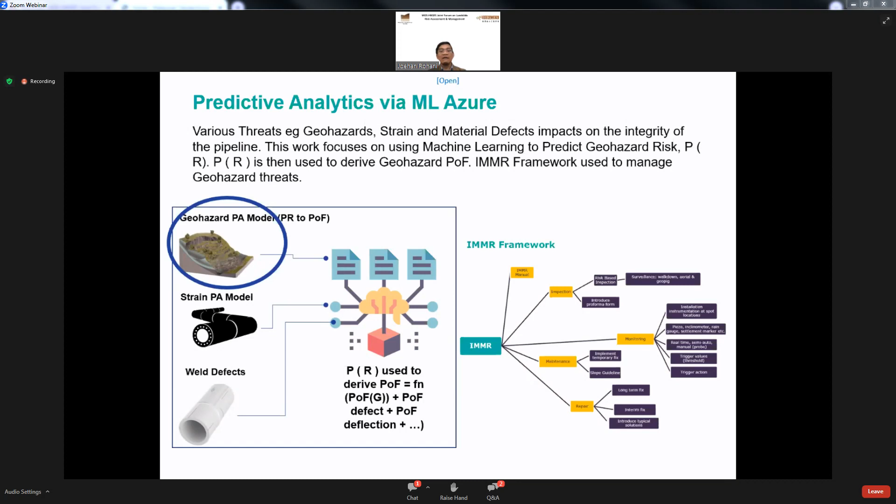So in the world of pipeline engineering, we look at what we call probability of failure of the pipeline. So there are various threats that impact the pipeline. And here you can see that geohazard is a threat, strain is a threat, weld is a threat. So geohazard threat is one of the threats that is facing the pipeline. I will focus on geohazard threat, right? And as alluded earlier, we also have a framework called the IMMR framework, where we manage our geohazard threat, right? The pipeline itself has got its own inspection system. So we call the IMMR framework for the geohazard threat.

Okay, I've been warned that I have a few more minutes. I'm going to go quite fast.

In essence, we have a system based on a pairwise method that gives us a risk rating. And for us in the pipeline industry, we have ISO 20074, which is used to derive the risk. How we translate the risk is we have a risk level that is associated to a probability of failure, and we have developed a system within Petronas where we associated the risk to a probability of failure for the geohazard, as alluded in this page. All right.

This slide is a bit busy, but what I'm trying to express here is that we need ML Azure. We're using Azure machine learning to develop comparisons between models like linear regression, multiple regression, right? We need to understand whether we are having a classification issue or regression issue. Because classification is saying, okay, how do I train my model to say it's high or very high risk? But regression is giving it a number.

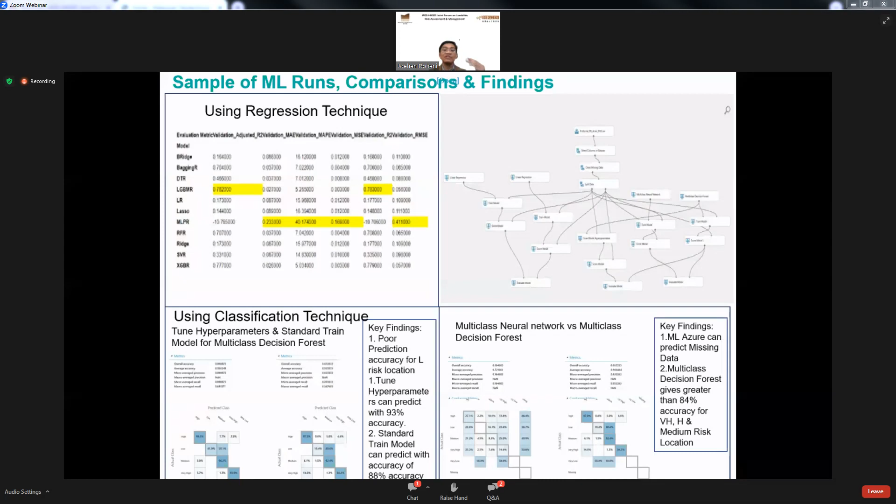So we're moving towards a regression technique where we're able to give each location a number which tells us the risk specific to a location. And we are also showing here that various methods give various accuracy. So we have to use feature engineering with various combinations for us to understand the risk.

Here, I'm just showing that we have been successful when we have at site said that location is very high risk, our machine learning says it is also very high risk. But at other locations we are not so successful. Our machine learning is saying things that are different from our site inspections.

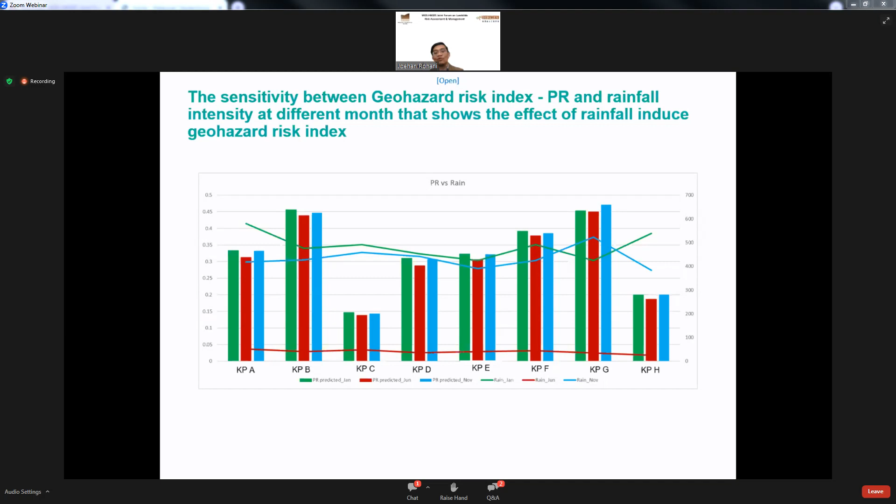And we also have monitoring of rain intensity because rain is the one that has the biggest impact on our slope stability issues. And what our machine learning is able to do is give a dynamic risk rating every month. So we're able to change the risk dynamically every month. So we're able to now know the risk being high or low on a monthly basis.

So moving forward, we're trying to understand these issues of rain, the rain intensity versus the permeability, and trying to understand what ranges of these risks are actually affecting the slope failures.

We have done site validation, and to me, 73% validation is an industry standard. We hope to improve this, and hopefully with more data, we can improve our estimation of our risk. We have a dashboard that we use to manage our risk.

I hope I'm not moving too fast, but in conclusion, to meet the committee's timeline, I'm just to say that machine learning can be leveraged on to help with better improvement of prediction of geohazards, but we need continuous improvement. Increase automation, less dependency on human intervention, use more digital technology. We have various experiences, but we believe multi-spectral sensors will help us with use of drones to provide cost-effective and consistent data acquisition. More data with calibration, people at site.

People are still very important to us to help with the prediction and detection. With that, I think we need to invest in technology and learning for us to enhance the capability of machine learning for our system. But it is not a silver bullet.

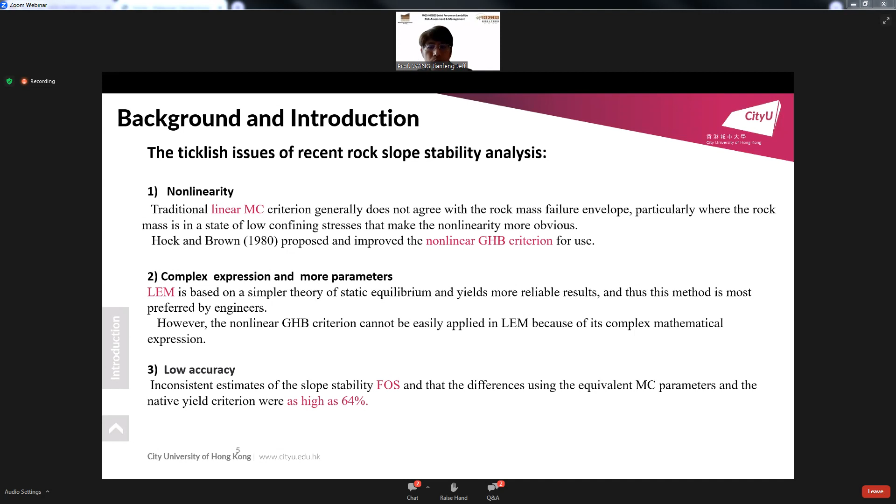And the inconsistency estimates of the rock slope stability, FOS, between the equivalent MC criteria and the nonlinear GHB were often as high as 64%. So this low accuracy presents an urgent need for the improvement of the traditional MC strength criteria.

So this is a framework of the method presented today. It's going to be a new LEM method to analyze rock slope stability using the extended nonlinear GHB criteria. First of all, we will obtain the approximate analytical formula of the shear strength expressed in the nonlinear GHB criteria. Then this criteria is expanded using the Taylor series with assumption of the stress on the slip surface.

Then the static equilibrium conditions of the sliding body will be established to yield the system of linear equations of a few coefficients in the GHB criteria. Upon solving the linear equations, we'll obtain the stresses on the slip surface. And finally, the FOS will be calculated and verified using the known stress on the slip surface with an arbitrary shaped slip surface, which is an advantage for the current method.

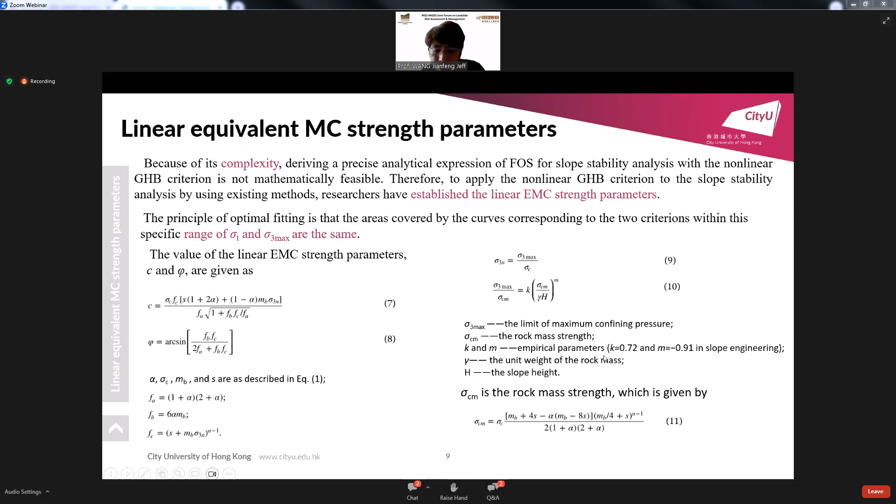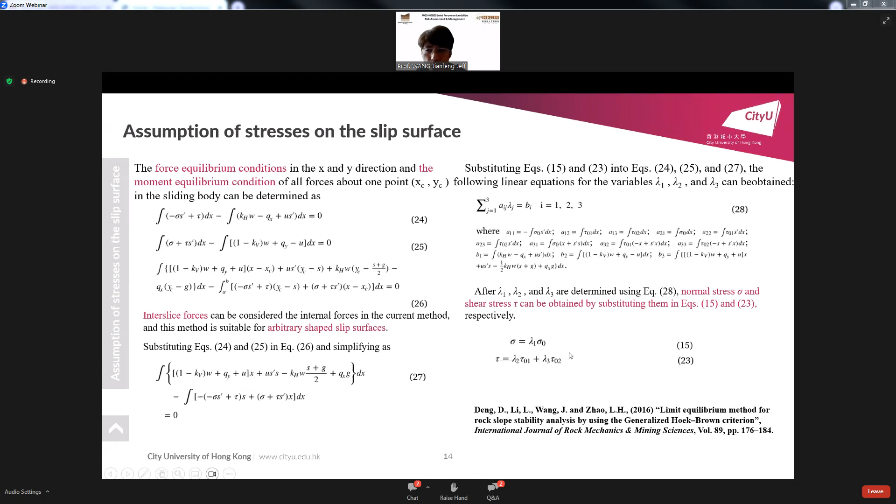Okay, so with the coefficient a_ij being the various integral forms of these stress variables. So by solving this equation, we can attain the values of lambda 1, 2, and 3. And then we can use these two equations to calculate the normal stress and the shear stress. So finally, using the calculated normal stress, shear stress, and instantaneous friction angle, we can calculate the factor of safety using this. Okay, so more details can be found in our paper here if you're interested.

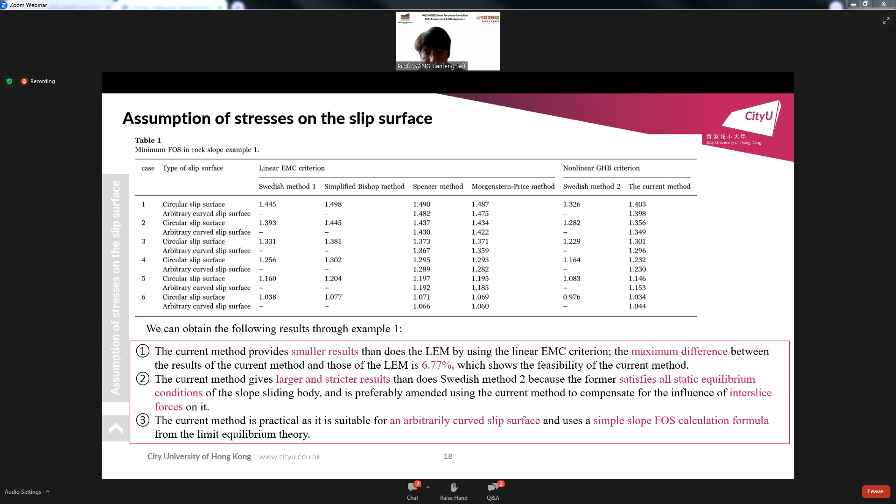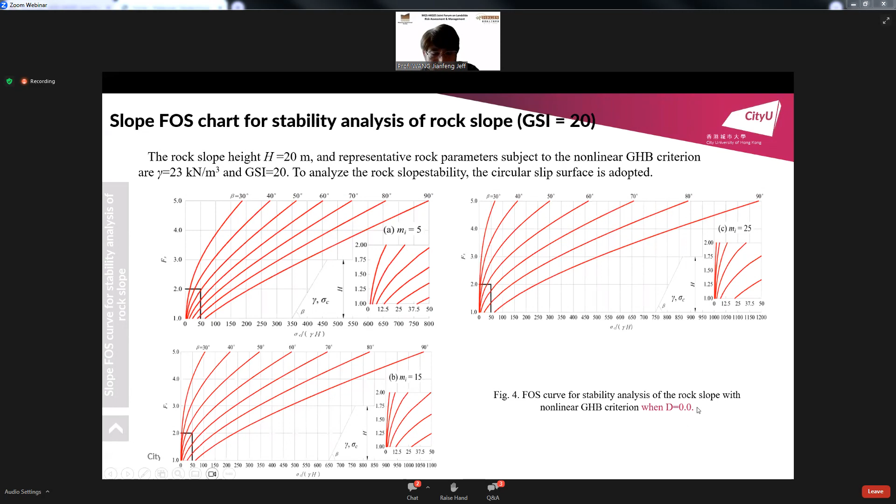So the next part is a show of the various charts, which are created using the proposed method. So we show the slope charts for the rock slope of GSI equal to 20, for D equal to 0 here, the first case, and here is a case for D equal to 0.5 and D equal to 1.0. Okay, so engineers can use these charts for practical rock slope stability calculation very conveniently.

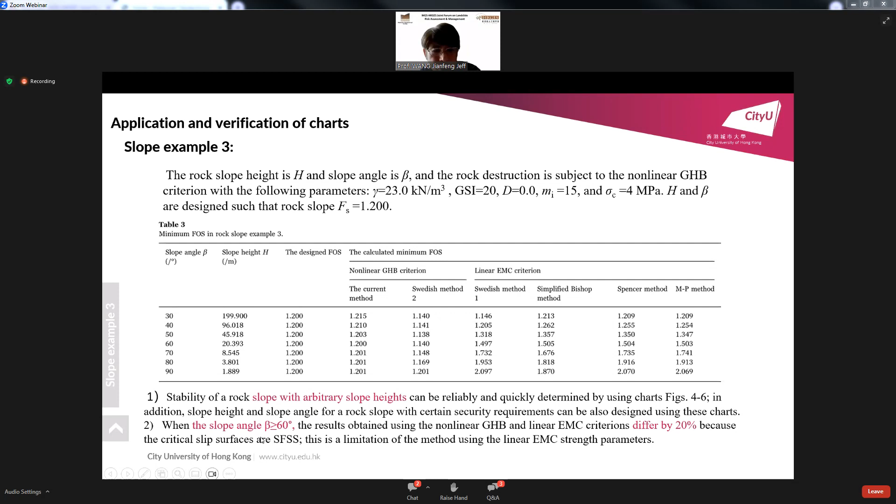And this is the last example showing the use of the charts to evaluate the rock slope. Okay, actually, the design of the slope to meet a designated rock slope factor of safety of 1.0, 1.2. So we show that the stability of the rock slope of arbitrary slope height can be conveniently determined using the charts, and very satisfactory results can be obtained.

Okay, so finally, several conclusions can be obtained. I'm not going to read every clause. So basically, we show that the proposed method is very advantageous against the traditional LEM method, in that it can deal with both circular slip surfaces and arbitrary shaped slip surfaces and provides very competent results. And it can also generate FOS charts, which can be conveniently used to analyze rock slope stability.

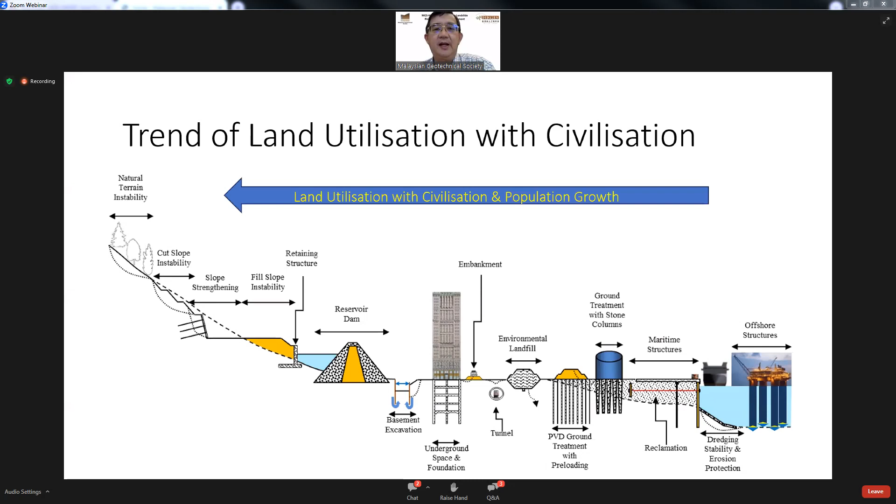So this chart basically shows you how we are moving from the flat land or near the coastal area towards the hillside. But of course, not all landslides will always happen at the hillside. So long as there is any differential in elevation, gravity will work to cause the landslide: the earth mass gains potential energy, and from potential energy to kinetic energy, impacting us.

But of course, there are other geohazards further aggravating the landslide potential, like earthquakes loosening some of the overburden materials. Some years back in East Malaysia, Mount Kinabalu had a very serious earthquake that really shook out some of this overburden, very loose. Any rainfall that comes, it becomes a debris flow, and quite a very impactful kind of landslide happens.

And of course, the structural geology can also constitute a lot of these features for instability due to discontinuities, mostly discontinuities causing instability along a particular weak plane. And this kind of discontinuity will also be inherited through the weathering process, from rock slope, jointed rock slope, to soil slope. These three types of weathering are very common and cause a lot of overburden, loose material, creating material for a landslide. You can see this is mostly in East Malaysia, and the level of tectonic action can really squeeze the material into any form of condition which adversely leads to a landslide.

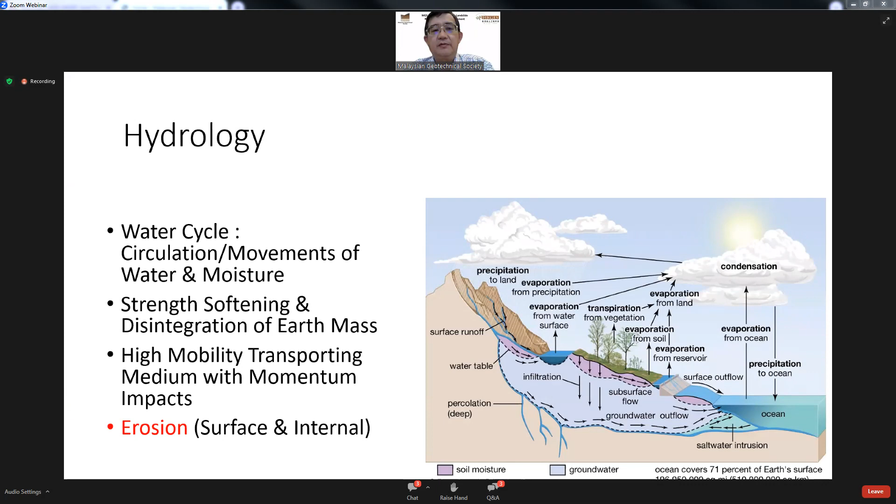So of course, another type of problem is boulders. A solid boulder is also another form of impact in landslides. Without water, our landslides would be much reduced. But certainly, water is a well-known medium, other than weakening the soil, it is also a transporting medium to bring forward the landslide mass.

And this is on a bigger scale, the meteorological effect, the monsoon seasons. But now, of course, we have a lot more intense rainfall. Climate change altered this natural frequency of recurrence twice yearly. The monsoon is now getting more disordered, so we have a lot of extreme rainfall. And obviously, extreme climate change does have a very serious impact. It's either very wet, or if not, then very dry. This overly wet or dry condition can also cause some interesting features in our soil that pose some failures. Later on, I will try to share with you.

So today, I'll try to share with you at least about six case studies. One starts off with a very small, very slow movement, a kind of creep instability. Another is material-related: swellable jointed rock slope, weathered rock slope. Another more impactful one is boulder or rock fall. And debris flow is quite common.

But this particular debris flow I show you actually is an excavation-induced debris flow. And I want to share with you how some of the weather conditions, soil and relict joints actually affect the stability of the soil slope. And some of the shrinkage potential can also cause problems for internal erosion.

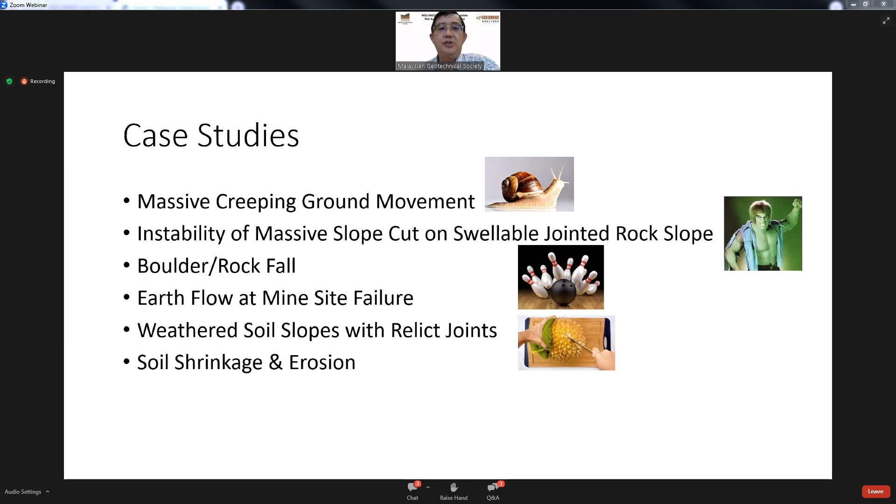Okay, this is one of the sites in Mount Kinabalu, East Malaysia, Sabah, and you can see there's a displaced boulder moving downward. This means that this is material coming out from the hilltops. Even a very gentle gradient, 10 degrees, can have a creep movement. This is partly because Mount Kinabalu in the past, during the ice age, had an ice cap there, so there's a lot of colluvium or debris deposited on the

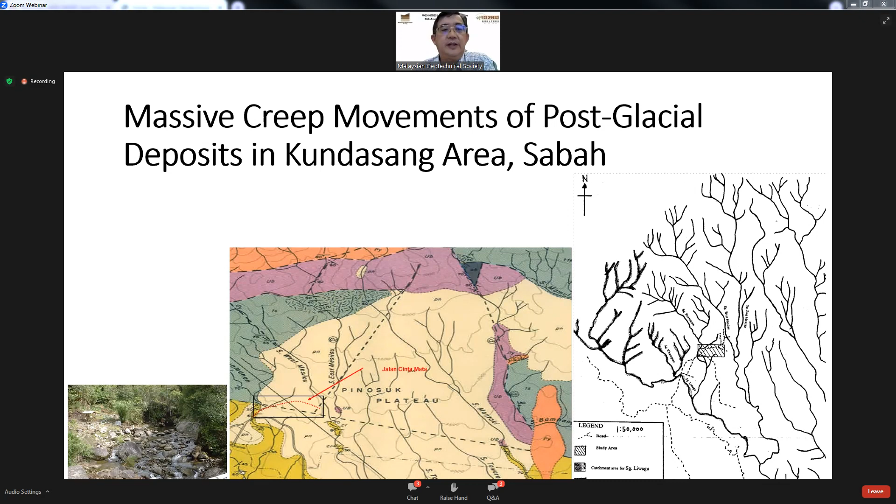foothill, and the natural drainage system is cutting the ground. I want to show you this drainage pattern forming a lot of steep slope valleys, and that will induce failure. It's another natural kind of excavation process, with the high groundwater. So in this case, I think we were investigating a route that is constantly in distress.

So we monitor the movement at a very shallow slip plane detected by the inclinometers, and it's creeping all the time. It's actually an everyday event, along 1.2 kilometers of this paved road. In the past, this site also had a parallel project running, a micro power, what they call mini hydro, and it did not even have a chance to be commissioned. I think the system all broke down. The pipeline is parting and cracking, and the powerhouse is also badly distressed due to the massive creeping movement.

So this is the inclinometer monitoring showing every day, every week. We're talking about 20 to 30 millimeter movement. That's why for any installation over this ground, in just a few years it will have moved onto another property lot already. So this is a creeping movement. It's not a drastic collapse, but it moves very slowly.

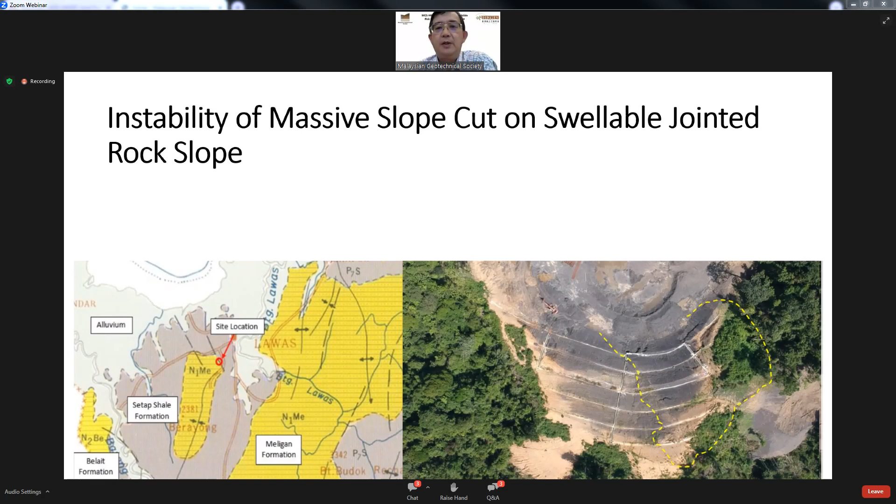And the second case is also in East Malaysia, in Sarawak. It is a cut slope to accommodate a water tank. The material is very swellable. Once you excavate, there's stress relief with the weather. It absorbs a lot of water, causing a lot of distress to the structures before you are even able to cover up the slope. This is the geological condition at the site. So you can see once they removed a substantial amount of overburden, the stress relief really caused problems here, and the drains all cracked up. So I think I will skip this. The visual expression should be good enough to illustrate this case.

And I want to highlight here, most of these granitic boulders, these are diorite. They have exposure of the soil and the weathered material under changes of moisture content. They have weathered material around the boulder, and when rain comes, it starts to get into this gap and erode. Slowly, the material is washed away, and it becomes an isolated corestone. One corestone boulder is left on the slope.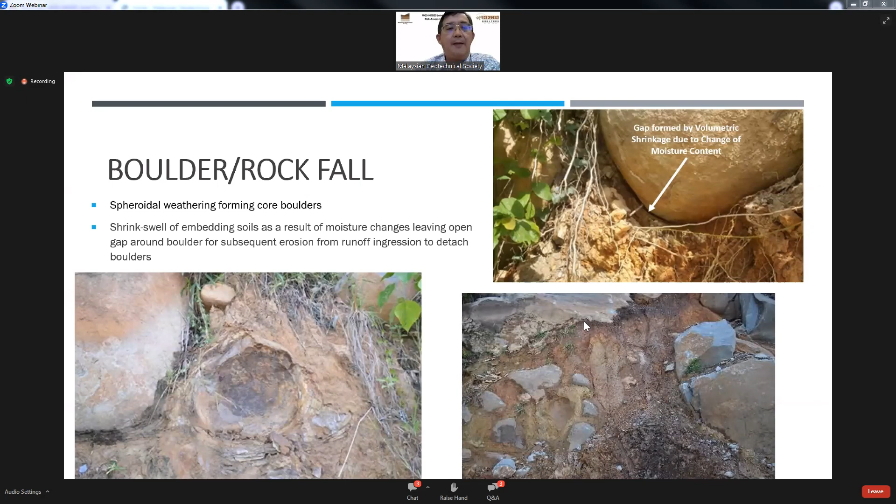So after a period of time, the supporting ground of this boulder develops a gap due to shrinkage and exposure to sunlight, and it becomes an easy path for water erosion. Once substantially removed, the boulder is left with a very limited point contact, crushing the lower boulder with the big boulder on top. So it's a bearing failure. Up to a certain point, it cannot sustain, and it will start to move and roll.

So we actually asked the developer to stabilize all of these on the spot due to the very dangerous conditions. Once you have any mishap, this boulder will roll down. So we are putting back the support with some concrete and also buttresses to stabilize it. A boulder is a very naughty fellow, because if you let it gain energy, it will be really notorious.

So this is a short clip of a boulder. You can see it smash onto the car, causing casualties. This happened in India recently and went viral on the internet.

So you can see boulder is not a very easy problem to deal with. So I just want to highlight the consequences of this boulder impact. And the other one is a rain-induced debris flow. This also happened in one of the... I will just fast forward because the time is limited.

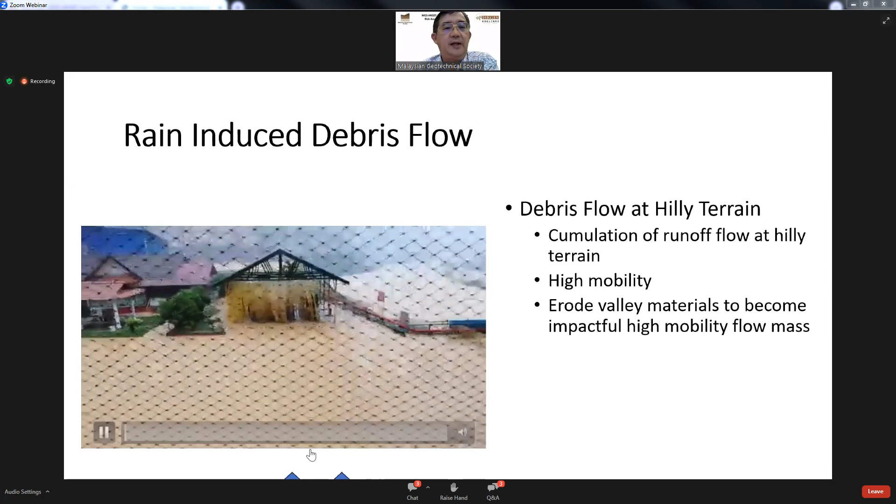It happened near a dam site, and the debris flow actually caused very devastating damage to the surroundings. But fortunately, I think the dam is very much intact. You can see the debris. Once it bursts, the water runs down with the debris coming down, very seriously impacting the hillside.

Very high mobility. I think Hong Kong has shown some very serious cases of this. So I think I will stop this. Here you can see the running down of this debris. It really is like a tsunami.

And this is an induced debris flow due to the excavation of the mine pit. You can see the flowing of these very viscous materials coming down from the landslide. It's really like a flow type of material.

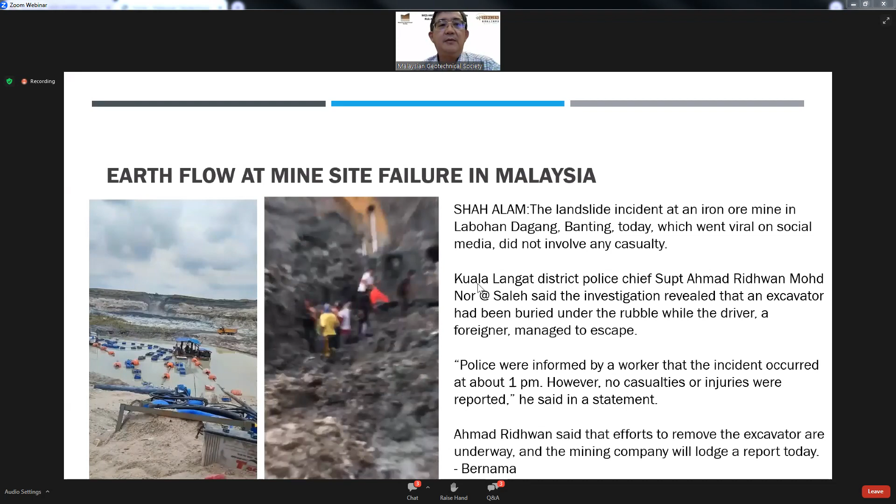And then another bigger scale one is in Perak, 1993. A mining site near the seaside collapsed and became a lagoon. The mining pit eventually became a lagoon next to the coastal area.

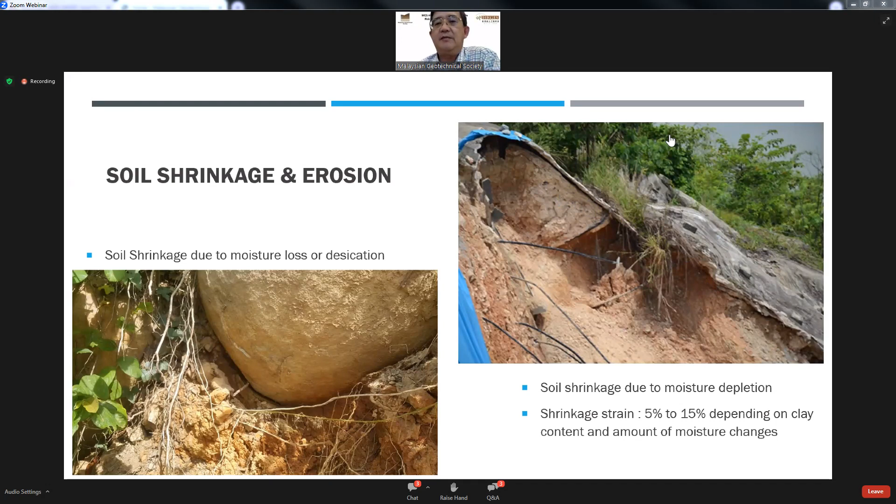And I want to highlight here, for any shotcrete covering a high slope, with the moisture of the soil depleting, they will form a gap. That's why I want to highlight that when there's a gap there, the face capacity of the soil nail may have to be reviewed. It may not be what you have assumed in your design. So basically, this is just one illustration.

Okay, the very last one I would like to highlight is on our practice here. There's a factor of safety requirement for treated and untreated slopes. For the treated slope, we ask for a factor of safety of 1.5. For the untreated slope, we ask for 1.3.

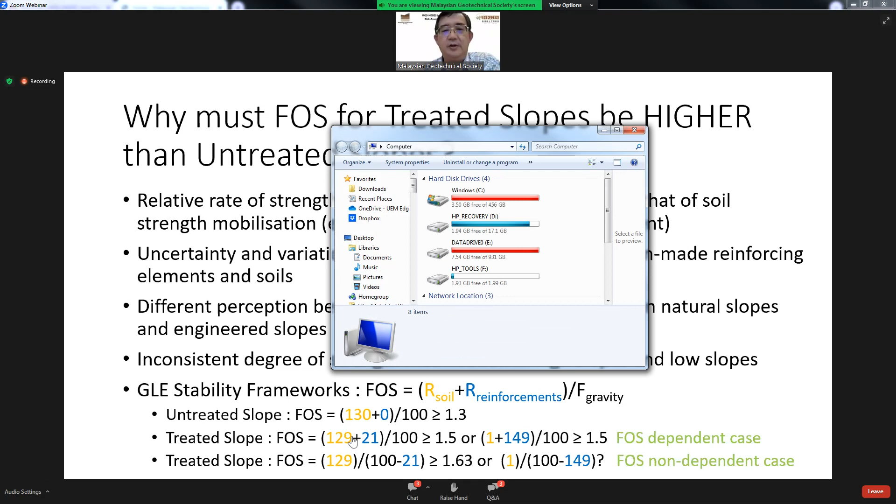But this resistance can come from soil and come from reinforcement. But when you come to a treated slope, assuming that because our soil can only give me 1.29, so factor of safety is not enough to give it 1.3. So I have to put reinforcement. Once you put reinforcement, the requirement asks for 1.5. So it means that we actually have to reinforce the slope with a higher factor of safety.

These are the two different cases for comparison. So I will leave the notes for the audience to have a thought about that. So it's important for us to rectify, if there's a chance, room for rectification or making good of this requirement, then we should make an effort, because it costs a lot of money, and logically in the design process we have to make it in the right perspective.

So I think I will come to my conclusion. Just now I highlighted that because of the land use, we face a lot of population growth, and our land use becomes more challenging. And I shared some of these case studies as food for thought on some of the problems I highlighted.

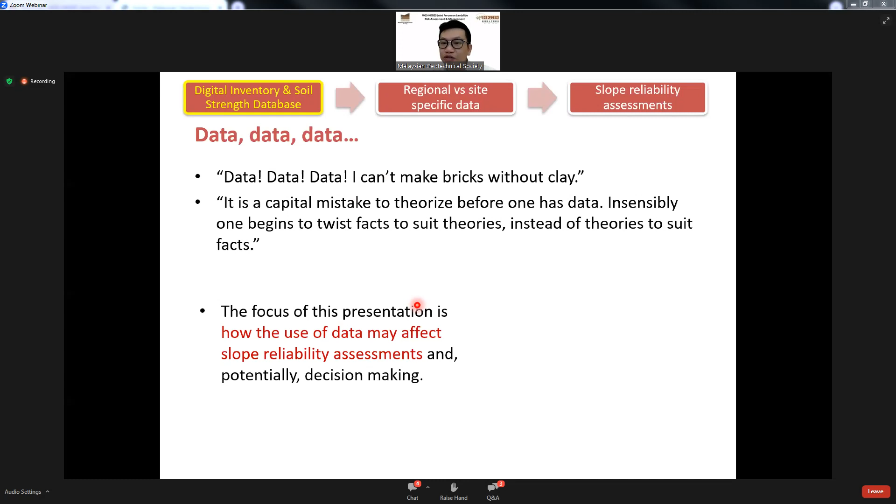If we want to define or quantify uncertainty, obviously we're going to need data. So these two quotes, I can give you 5 seconds to think about where they came from, but I think this is very much related to our profession. We need good data and we need lots of them. So this quote is actually not from the Terzaghis or Casagrandes of our profession, it's from Sherlock Holmes. But then again, I think it's very relevant to what we are doing in our profession.

We need good data. And I'm going to use the next 11 minutes or so to talk about how the use of data may affect slope reliability assessments. So in the beginning of today's event, engineer Roy Hong of the Geotechnical Engineering Office of Hong Kong mentioned this G-Info system where our government has combined lots and lots of investigation reports and testing reports and then compiled them very nicely and put it into this electronic platform.

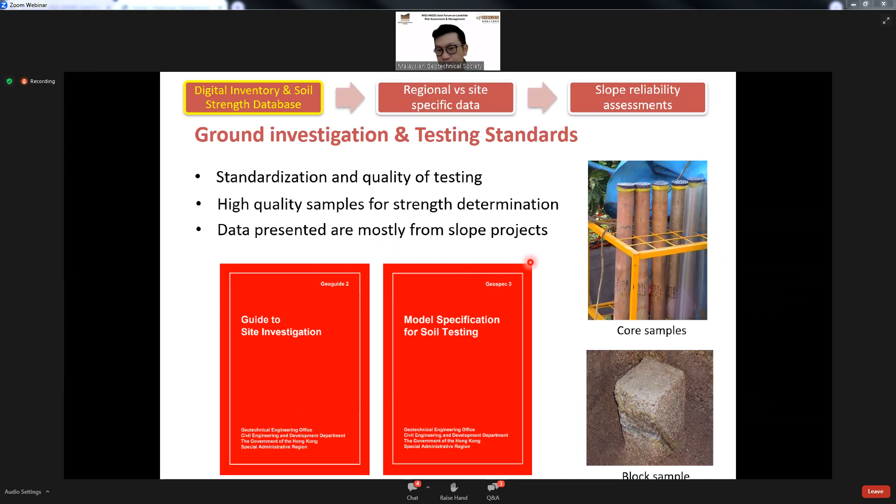And for those testing data, most of them are from high quality samples obtained from the field, either core samples or block samples, and they're very carefully transported to the lab for high quality triaxial testing in order to obtain the shear strength parameters of the soil materials in Hong Kong. So in this regard, our authorities are very careful and very good at making sure that our profession follows good standards in testing of our soils.

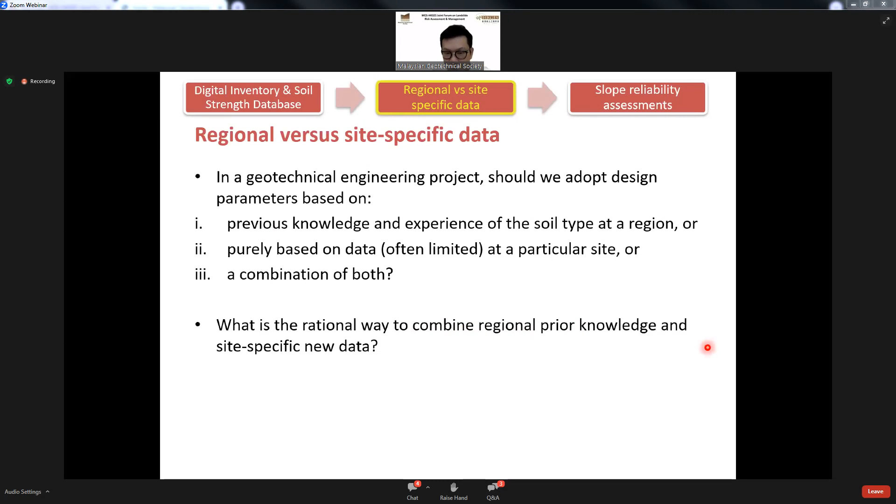We try to hybridize or combine our knowledge from our particular site with what we already know in a regional context. So the question becomes, how can we find a rational way to perform this sort of hybridization or combination of knowledge? In fact, in 2019, there was a very interesting, very good paper published by Professor Ching from Taiwan and Professor Phoon from Singapore, which talks about this idea of hybridizing information.

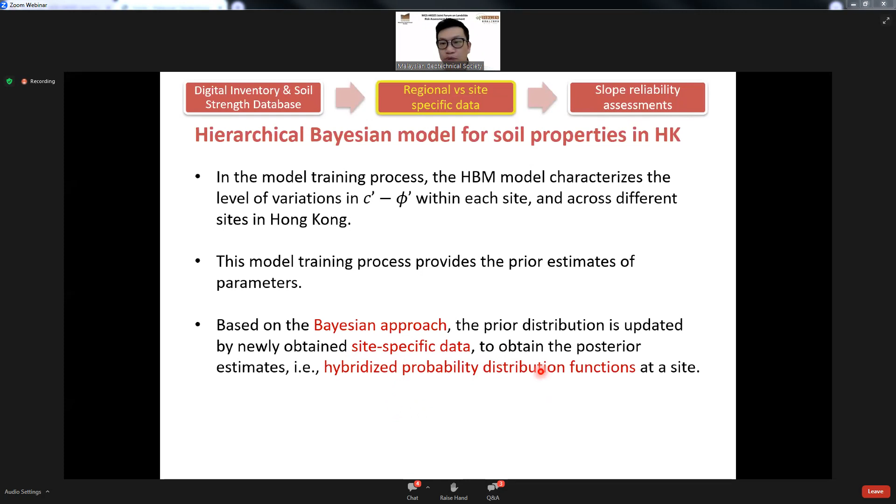Like I said several times already, the main idea is to combine information from the sites with our background regional knowledge. And in the process, we're going to identify and quantify the variations of our shear strength parameters within each site and also across the different sites in different parts of Hong Kong using this sort of mathematical framework. And then there's a model training process. There's also a combination or hybridization process. I'm not going to go too much into the details with the consideration of the time.

So we applied this sort of idea to a landslide case. The landslide itself happened some 26 years ago at a location called Ching Cheung Road in Hong Kong. The slope failed after intense rainfall due to a typhoon. And in the geotechnical investigation, we obtained 25 sets of site-specific triaxial test data, and we know the groundwater level reasonably well from the investigation of the landslide.

I believe most of the audience are familiar with the program SLOPE/W. In the SLOPE/W program, you can specify the slip surface in your slope analysis. And in fact, there's a functionality in SLOPE/W where you can click Monte Carlo simulation to give you probabilistic analysis, which applies to one slip surface. But in the version of SLOPE/W that I use, that Monte Carlo simulation will only apply to one slip surface. And we all know that a slope can fail along a number of potential slip surfaces.